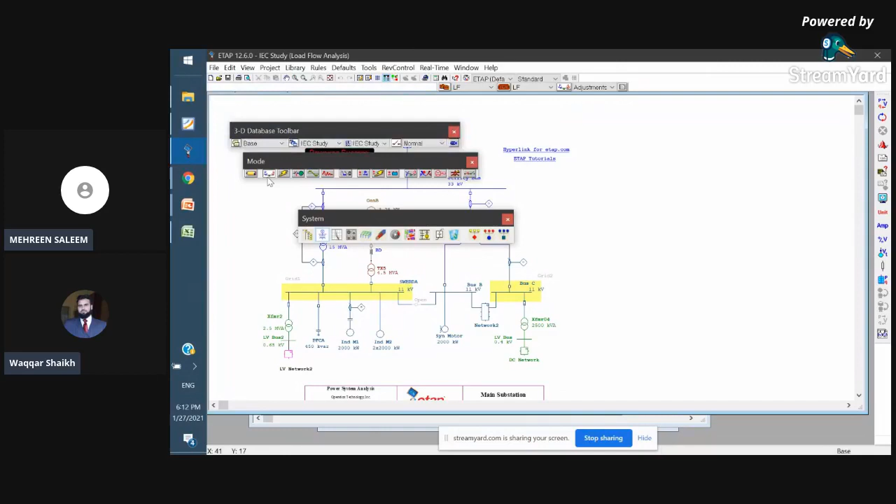You can see here, there is one toolbar here. There is another toolbar here, and another toolbar hidden here. It's taking some time to load. Anyway, sometimes it also loads the library of the software.

Meanwhile, we'll go into the main presentation so that I can outline the topics we are going to learn. First, we will see the overall interface and the various toolbars in ETAP, and then we will talk about 3 important toolbars. Still it's taking time.

Okay, no problem. Now you can see in this PDF, this is the PDF which shows you the overall interface. Here we have different toolbars, and all these toolbars are for some purpose. I think I have to disconnect it and run it again.

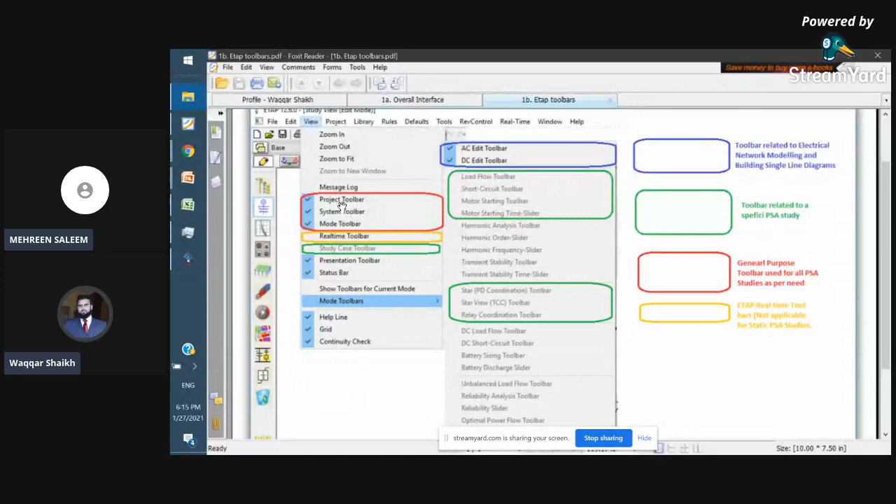So let us talk about the general purpose toolbars, where we have 3 types: project, system, and mode toolbar. The project toolbar is the first one you can see right over here at the top. Most of the buttons you are already aware of; they are more or less similar to the buttons available in Microsoft Office or Word.

But some of the important buttons here are the continuity check, this button here, and the grid, which helps us model the network with proper indentation and check whether the bus is energized through a swing bus. I will explain more about continuity check later. So this is the project toolbar. It allows you to open and create new projects.

The second toolbar among the general purpose toolbars is the mode toolbar. This mode toolbar is the backbone toolbar, and all the functioning of the software can be controlled through it. It has many modes. The first is edit mode, and the remaining modes are load flow, short circuits, motor starting, harmonics, transient stability. All types of power system studies are covered in these modes, where you can switch between the edit mode and the system study modes.

I apologize, I think the software is again struggling. Okay, now it's working, alhamdulillah. Now in the edit mode, we can do the network modeling. As you can see, there is an existing ETAP model here.

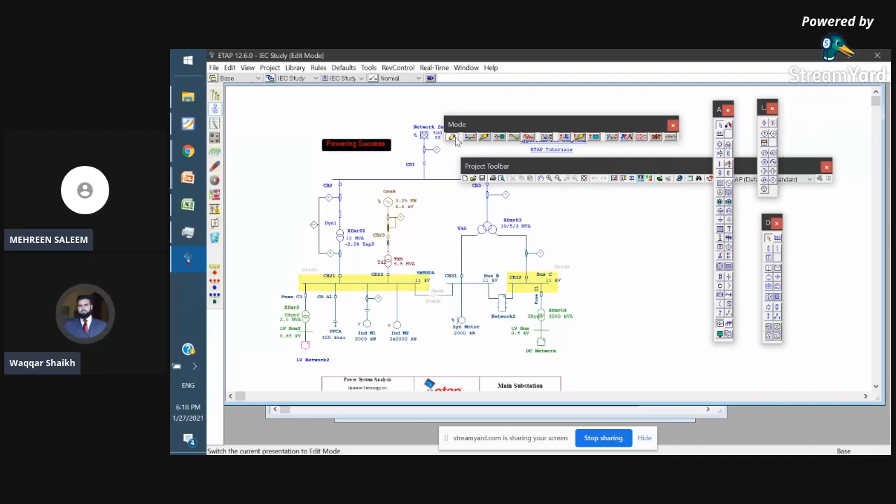Okay, so these three toolbars are basically for the modeling purpose. You can create the network modeling from these three toolbars, and these three toolbars will be only available when you are in the edit mode. If you go into any other mode, these three toolbars will be hidden and it is interlocked with edit mode. For example, if I go into the load flow mode, you will see that the toolbars have gone. So it will be only available in the edit mode.

Okay, so I hope you understand the mode toolbar, the project toolbar, and the AC, DC, and instruments toolbar, which are available in the edit mode. In order to send them back, you can click on the blank area. Okay, then you can see there is another toolbar which is called system toolbar. In this system toolbar, some of the buttons are very important, but most of the buttons are not used for distribution network studies.

I can give an example, like we are mostly using the one-line diagram view so that our workstation is available to us where we can do the simulations and make the models, right? Also, there are some buttons which are related to the protection coordination study, which mainly relates to the coordination of protection devices like protection relays, circuit breakers, or fuses. So in order to see their behavior and coordination between each other, we can use this feature, which is Star view. It enables us to see the time current characteristic curves.

There are some other buttons like underground raceway systems, grounding mesh analysis, and cable pulling systems. But most of the time for distribution networks, we are more or less concerned with Star systems and one-line view. And then we sometimes also need to go into the dumpster. It is just like the recycle bin. It's a very interesting feature in ETAP. People consider it similar to the recycle bin, but it does not work like that. I will try to explain some part of the dumpster in this discussion.

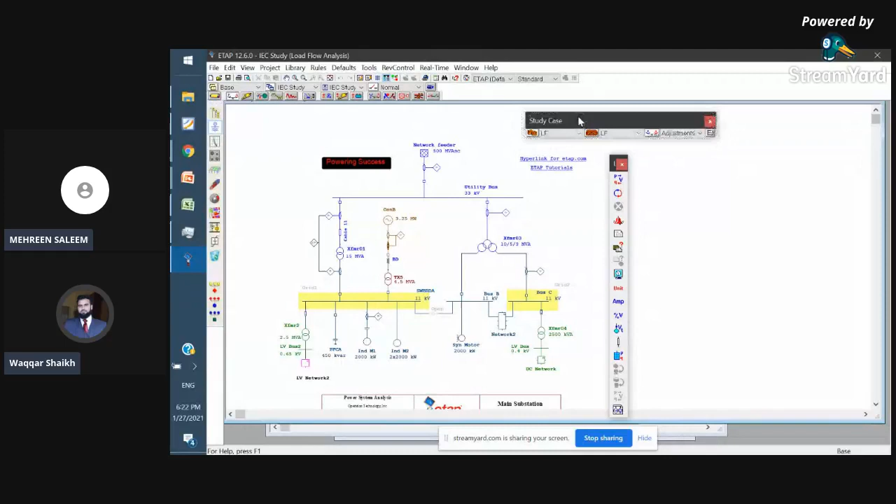This is one of the most technical toolbars in ETAP software, and one who has properly learned this toolbar and its features is more or less 80% knowing about that particular study. So I don't know when the students are learning by themselves whether they pay attention to this toolbar or not, but my focus will be to give you more detail about this toolbar in our coming discussion. So the study case toolbar is one of the system study toolbars, which in this case, as we are in the load flow mode, you can see here, is a load flow study case toolbar, right?

And then the other important toolbar within the system study mode is the analysis toolbar. This toolbar contains some buttons which enable us to run the simulations, and some of the buttons which will be frequently repeating, like this bell button, alert view, or the report manager, or the display options. These options will be repeatedly coming in all the analysis toolbars in the rest of the study modes. So you understand that these two toolbars are typical toolbars for all different types of study modes.

If I go into the short circuit study mode, you will find the same two toolbars now becoming the study case toolbar for short circuit analysis and the analysis toolbar for short circuit analysis. And the buttons would have changed, the features and the inside functionality would have been changed. Okay, but the concept will remain the same, like the functioning of the software will remain the same, study case and the analysis toolbar. And these two types of toolbars are specific to system studies.

Again, if we go into the motor starting mode, you will also find these two toolbars here. So it's important that you learn some of the common features of these two toolbars, that I will try to explain. But the specific features of these two toolbars will be more related to the system study knowledge. Okay, so I hope you have understood the way these two toolbars are presented, study case and the analysis toolbars, which I'm calling system study specific toolbars.

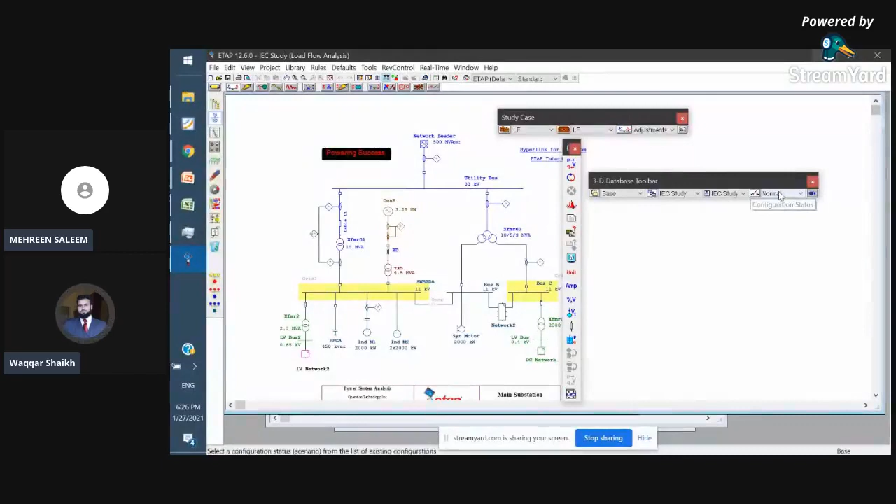Okay, it means you can have 3 or 4 configurations, and similarly you can have 3 or 4 simulations based on different configurations. Okay, so the 3D database toolbar configuration feature will enable you to create different types of configurations in your network model. Okay, and the revision database toolbar is more about the equipment properties. Let me give you an example.

For example, a factory is newly constructed, and new transformers and new electrical equipment have been erected there. Okay, and after some time, one of the electrical transformers there is going to be upgraded to a higher size rating. Okay, and in order to maintain a revision history, so that any next user who is going to work on ETAP software will have the previous history knowledge or the understanding of the past network, he can check it from the revision database toolbar.

This option is also sometimes useful when we are doing arc flash analysis, where we want to see the behavior of the protection settings. By changing the protection settings on the arc flash levels, we put one type of protection settings under one revision database, and another type of protection settings under the other revision database. By switching these different revision databases, we can check the behavior of the network arc flash levels for different types of relay settings. So this can be used based on the engineering requirements.

So this 3D database toolbar is one of the important toolbars required for any type of system study. You cannot proceed with simulations unless you have created some configurations in your project. If it is a simple radial network, you would not be required to create configurations, because a radial network means there is only one source of power. But for a double-ended radial network, you will be required to make some configurations here. I will tell you in my rule of 9 where this toolbar will be used. Okay, 3D database toolbar.

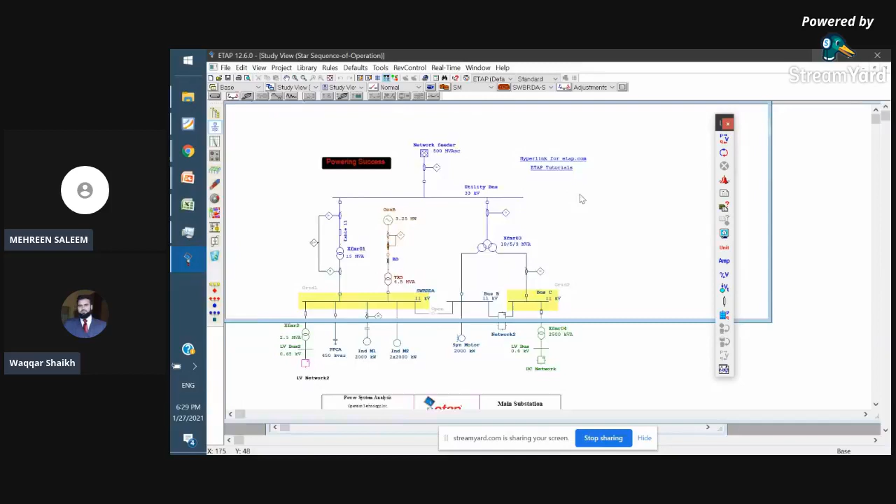Now you can see here, in the load flow mode, I have this option available, and display options will enable me to see all these options. This display option allows me to see the results of the simulations under different units and different parameters. Whenever we run a simulation, the results appear in red color, and then the results tab of the display option is applicable. If you want to choose what information the screen displays for network elements like a generator or power grid, you have to go into the AC tab.

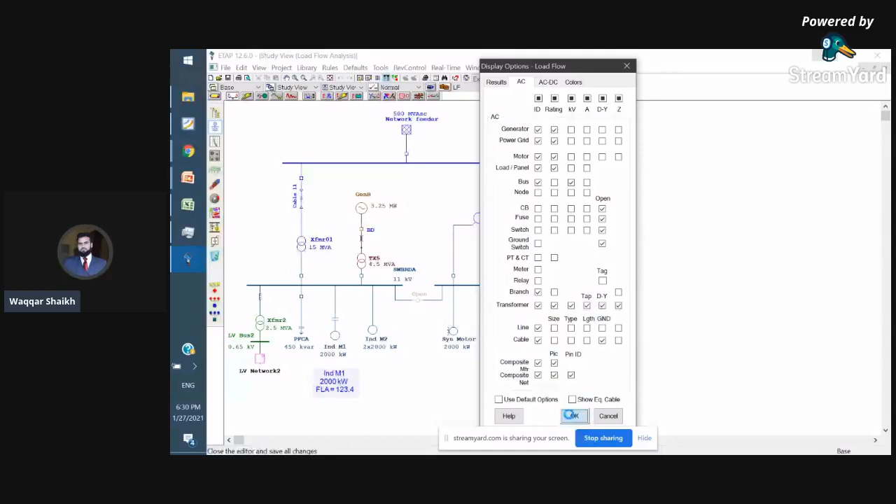For example, if I have a transformer modeled in the network and I want additional information shown on the display in load flow mode, I can enable features here like kV, tap, the grounding configuration, and the impedance. If I click OK, this information appears just beneath the transformer, as you can see. So the display option enables me to show more information on the screen depending upon my requirements.

Normally in system study modes like load flow, we do not need to show so much information about the equipment; we are more interested in the results, so we do not show much information. But in the edit mode, somebody may ask how to control the displayed information, because there is no button that looks like a television screen. If you look carefully, you will find the display options here. This is where you control the amount of information shown on your network model.

You can see here, I can change how much information I want to show on this display. This feature is very useful. Sometimes we are not required to show so much information about the equipment, so we can control the amount of information shown in the workstation.

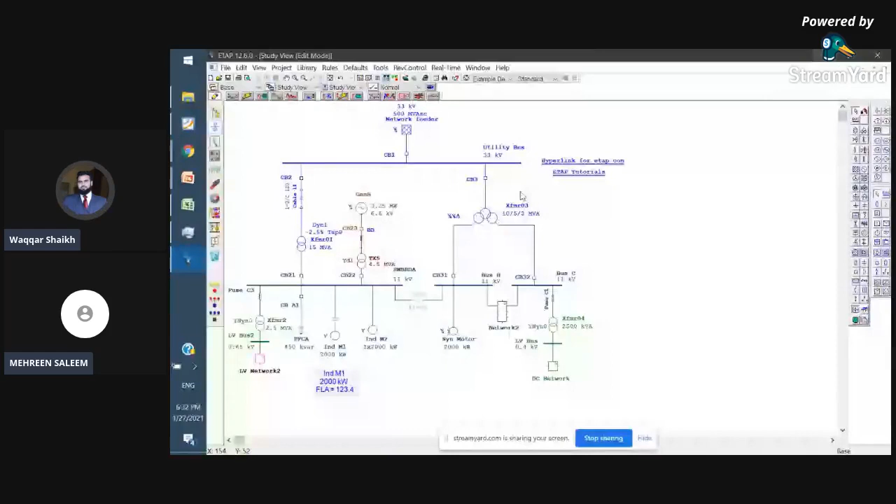If I go to the next feature for this analysis toolbar, report manager. This is also a repeatedly occurring option in the analysis toolbar, and you will find this option available in all of the system study modes. This is the report manager here. And if you go into the short circuit study mode, again, you will find a report manager here, similar like the other options. So whenever you are running a simulation and you want to make the reports from ETAP software, the report manager will help you.

Okay. So if I go into this report manager and if I have run a load flow simulation, I want a complete report of the study, I can use this complete feature. Or I want some specific results, I can use these features. I want some summary information, I can use this feature. And I can have different options, like I can print it in PDF or MS Word, whatever is my requirement. So this is also one of the repeatedly found buttons in the analysis toolbar.

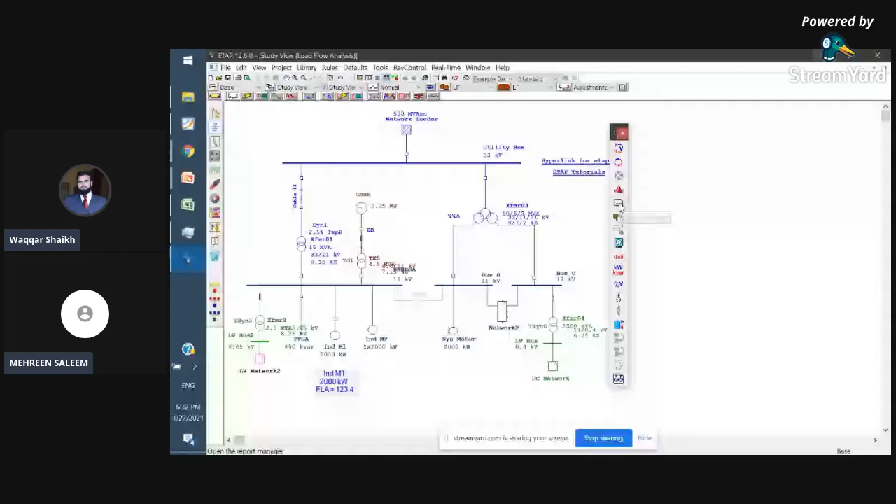If I go to the third option, alert view, this is a very interesting feature. In fact, this is a very useful feature for those who are doing ETAP studies. For example, if I go into the load flow mode and run a simulation, it will give me the results. And in these results, I will find that some of the equipments remain in their original color, some have turned into purple or magenta color, and some have turned into red color. So basically, this bell option or alert view will enable us to see where we have problems in our simulation. The problems which are the most critical, we would definitely need to solve.

For example, if I run this simulation and I find that the generator has turned into red color, it means this generator is overloaded, or it is suffering from excess reactive power provision to the network or excess reactive power absorption from the network. So at that time, we have to investigate the problem and find the solution. So the alert view option will enable you to see the different possible hazards or critical alerts in the network after the simulations are run. If I click this option, it will also show me where those problems are occurring, what are the reasons, what are the set points and what shall be the standard values.

Okay, so you can see here, if I have run this simulation, it is showing me that at bus location A, we have an under voltage of 94.9. The bus was originally 650 volts, but it is operating at 617 volts. So as per IEEE standard 399, we should not have lower than 95% voltage in the network after a successful load flow simulation. So lower than 95% means this is a critical alert for us, and we have to find some ways to improve this voltage to a higher value.

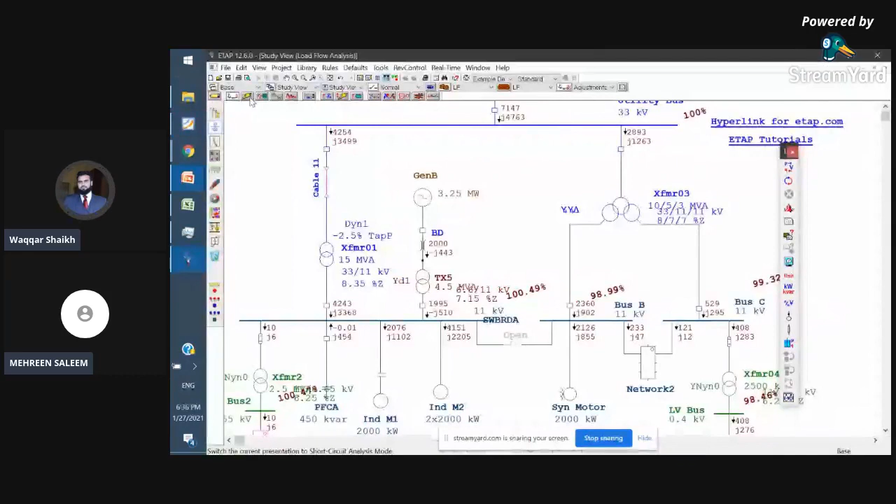So if you see in short circuit mode, you will not find the plots option here. But if you jump into the motor starting mode, you will find the plots option here, and it will allow you to see the different plots: motor starting current plot, or the motor's terminal voltage plot with respect to the time after the moment the motor has started and it has reached its steady state operating condition. What are the changes in its voltage level? So from this plots feature, we can investigate the performance of the motor during a starting condition.

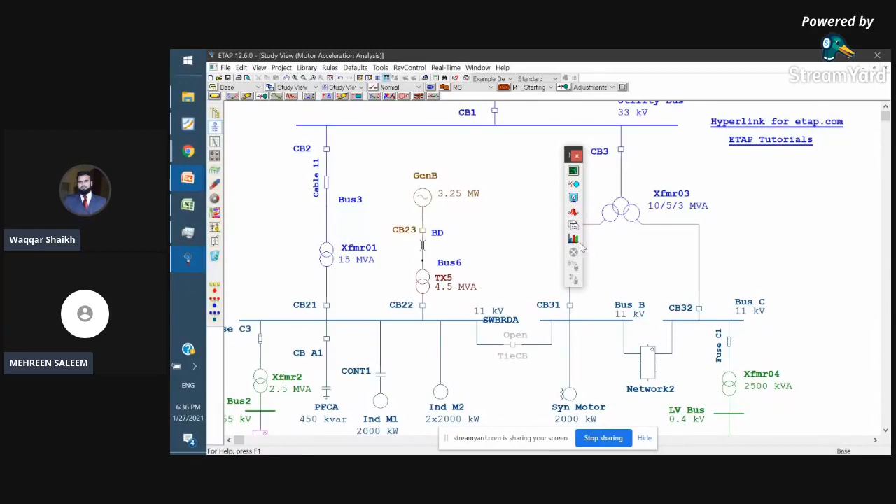So this is also one of the repeatedly found options depending from study to study. If you see this PDF, when you will be given the contents, you can find all the details of these 4 buttons in the next pages. Now we will see the overall interface of the ETAP software. I hope you have gone through the overall interface of the software, and these 30 minutes of discussion would have given you a basic idea what are the different toolbars in the software, and what its interface looks like.

I would repeat, some of the toolbars are general purpose toolbars like the project toolbar or the mode toolbar or the system study toolbar. Some of the toolbars are related to the network modeling, AC/DC element tools, or the instruments. And these 3 toolbars are interlocked to the edit mode. If you switch the edit mode, these 3 toolbars will disappear. So these toolbars can only be used as long as you are building an electrical network.

And the 2 toolbars which are specific to the system studies, as you can see here, are the study case toolbar and the analysis toolbar. These are the 2 toolbars which are specific to a system study, and you will find these toolbars repeatedly in all the modes. The looks will remain the same, but the features inside these toolbars will be changing from one study type to another. So with this, I end the first topic of our discussion. I hope this little introduction about the ETAP interface will be useful to you.

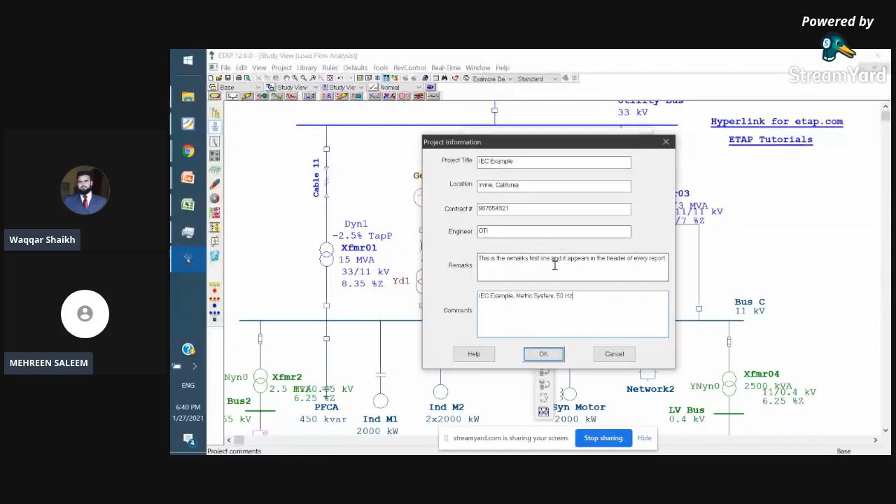What will be the benefit if we give all the details here? The benefit will be, when you run the simulations and have the study reports printed, all this information will be found on the reports created by the software. Normally the students who are in the early stage do not look into this feature and they print the reports without the information, especially those industrial professionals who are using the software as a casual user. They do not take care of this step, but it's an important step to give a professional look to your report in the end. So this is not a technical step, but it would give a good impression of your study to the next person. So the first step is to give the project information.

The second step is enter the project applicable standards. This is a very, very important step. And many ETAP users who have not worked properly or who have not gained experience in this field sometimes miss this step, and they do not know the importance of this step.

If you see here, ETAP is giving you the options to consider one out of the two standards, IEC or ANSI, and the different frequency levels and the systems of unit. Okay, and date format. Date format is not important, but the first three options are very important. How? I will explain to you.

There are two standards which are globally used by engineering companies for conducting power system studies. If I'm doing a fault analysis, it can be done as per IEC standard or it can be done as per ANSI standard. So if we keep our option as IEC, we will only see in the software interface the relevant terms as per IEC standard. And the same standard will be applicable for all the simulations, and the methodology and all the equations will be applicable from that standard, IEC standard.

Let's take an example of a short circuit study. Short circuit study is done as per IEC 60909. So if we are keeping the standard IEC, by default ETAP will take this option in the software as IEC standard. All the simulations will be considered by default IEC. You can switch this information within the software interface at different places.

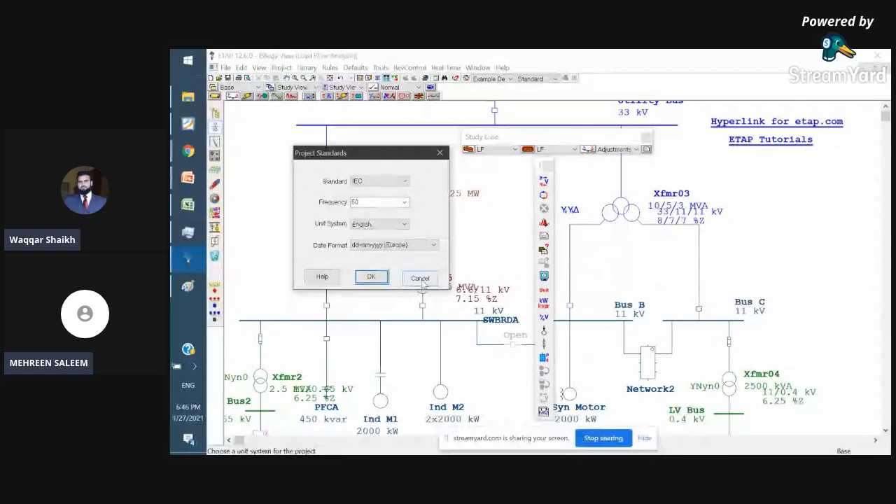So there are two types of cable sizes based on the English system or the metric system. So it's important that you select the right option here, so it will not create any discrepancy when you select the cables in the ETAP software. So this is the second step, which is important for you to fine tune in the ETAP software when you are creating a new project.

The third step is to build up your model. This is called network modeling. Most users who start working on the ETAP software start directly on step number 3. They forget to implement what has to be done in steps 1 and 2, and it creates many discrepancies at simulation time, and it also gives a bad impression to the one who will review your work. So always follow step 1 and step 2.

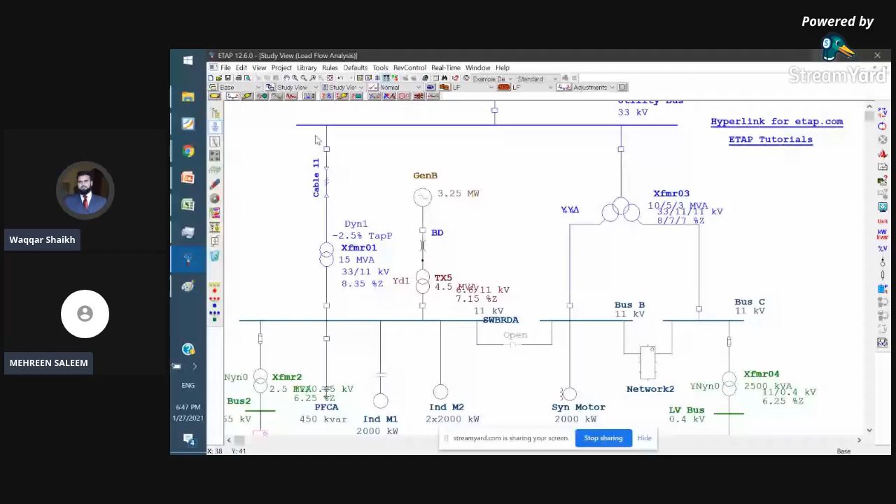Step 3, I'm splitting into three steps. The first one is to enable the grid option, the second is to enable the continuity check, and the third is to start building the electrical network. So if you are doing step number 3, there is a feature in the project toolbar. You can see here this feature, show grid lines.

So you can see these are the grid lines in the ETAP software, and these grid lines can be made brighter by changing the options from here. There are options available inside this button where you can make them brighter or lighter. Yeah, from here you can change its color. You can see I'm making it navy blue. It has changed, but do not make it so dark that it confuses your network. I'm just giving you an example that we can also manipulate the sharpness of these grids.

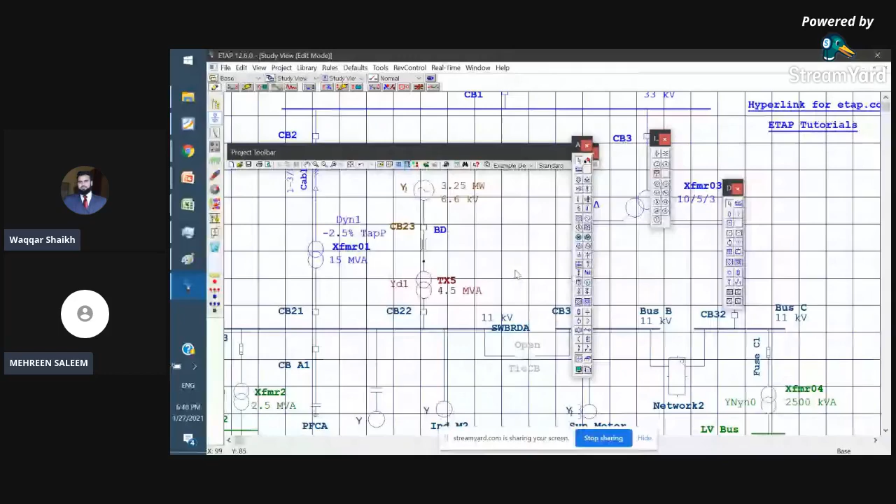So let me bring it back to the normal color, which is easily identifiable. Let's make it gray. So now it's again turned into a slightly dull color. So first thing is you have to enable the grid option. The second option is continuity check. This continuity check is important, especially when you are working on network modeling and you want to make sure that your connections are properly done.

If you are not enabling the continuity check, it will not give you a sense of energization of the equipment. For example, I have this breaker. I'm opening this breaker. You can see at this time the continuity check is enabled. If I disable this check, it will turn this de-energized feeder into the same color as the rest of the network. So it will not tell you whether this is energized or not. So it's always advisable to keep the continuity check on during network modeling, so that you are comfortable with the energization of the equipment in your network model.

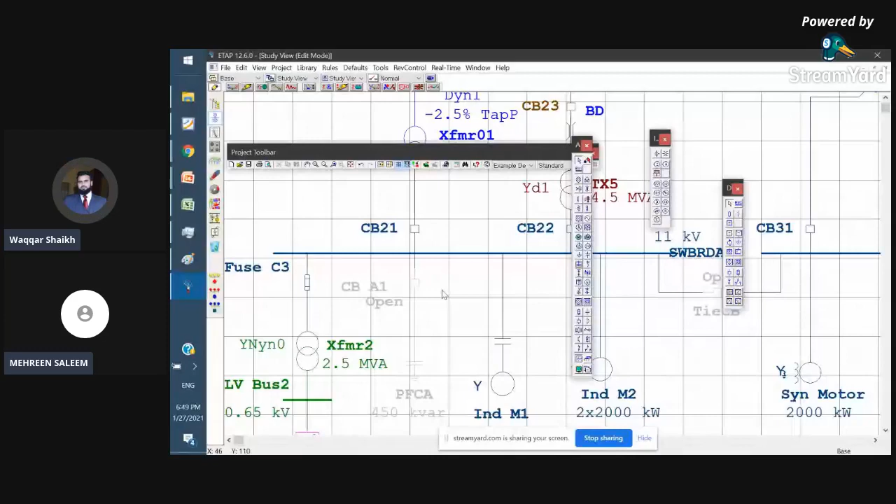If I go into the technical depth of this continuity check, even in the help of the ETAP software, you will find that continuity check doesn't mean connection correctness. Continuity check means the given component, bus, or electrical equipment is connected to a swing source directly or indirectly. A swing source is mandatory for running any type of study. If you do not have any swing source or swing bus in the network, your network cannot be energized.

Let me give you an example. In this case, the swing source is this utility. If I disable this feature and make it a voltage control source, the whole network will be de-energized. Power system analysis students would have studied in their course that the swing bus is like a reference bus, slack bus, or infinite bus that enables us to run the simulations and the load flow solutions.

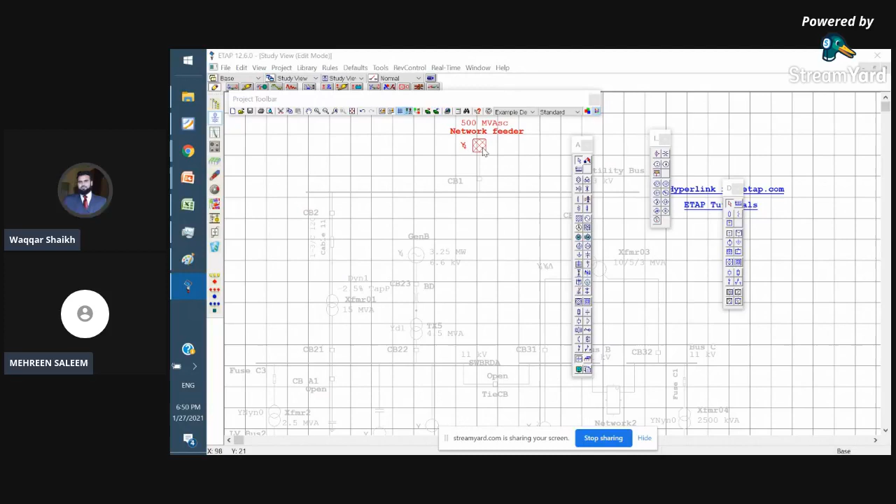So if we enable this continuity check and a component turns into a bright color, it means that component is directly or indirectly energized through the swing bus. Without the swing bus, your network cannot be energized, and you shall have at least one swing bus in the network for conducting any type of simulation in the ETAP software.

Okay. So now after you have enabled the grid, you have enabled the continuity check. Then the third thing is network modeling. You have the AC/DC element toolbars, which will enable you to do the network modeling. You can bring the grid, you can bring the transformers, motors, cables, generators, VFDs, breakers, fuses, contactors, whatever, all the electrical installation components you can find from these toolbars, and you can use them in network modeling.

ETAP tutorials and the YouTube videos can help you to understand how to model these equipments. But the most important thing is you shall be physically aware about how this equipment works. Okay. So for example, if you are modeling a transformer, you shall be physically familiar with the nameplate data of the transformer. Only then you will be able to understand how you are going to model the transformer. In this discussion, I am not going into the modeling details.

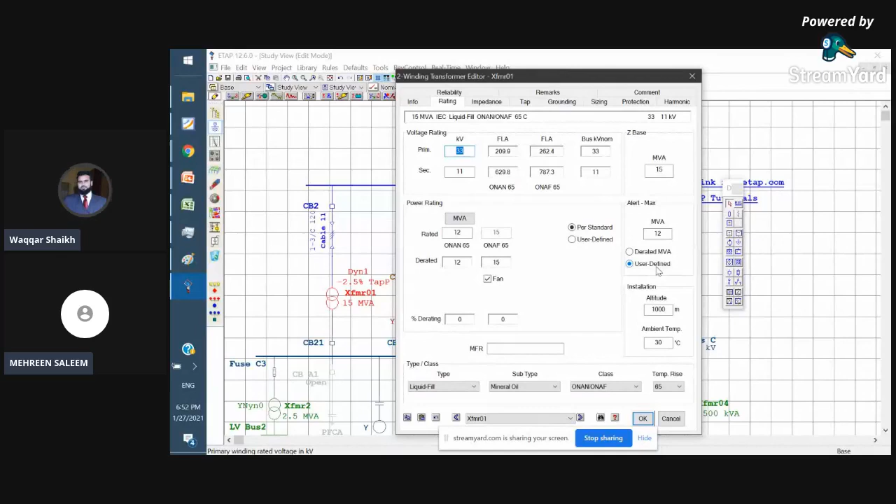But the thing is, whenever you pick and drop any component, you have to go into the component and give the software all this information. Some of the tabs are not relevant to the study. Some of the tabs are relevant to your particular study. So you shall have understanding of the equipment data so that you can input that information into the given equipment during the modeling of the network. Okay. Now you can see here as the third step, 3C, you are building the electrical network, AC/DC elements. Okay. Now let us see step number 4, creating various network operating configurations.

Okay. So as I told you, after you are done with the network modeling using the edit mode, you should not jump directly into any of the study modes, because there is one very important step which is called defining the configurations. Okay. So using this feature, we can define different configurations of the network: normal operating configuration, abnormal operating configuration, like single-ended operation of a dual-ended switchgear. Okay. So by using this feature of the 3D database toolbar configurations, you can create different configurations. And one of these configurations will be considered at the time of simulation. When you change the configuration, your simulation results will also vary.

Okay. So now in step number 4, we are creating a few configurations in the ETAP software depending upon our study requirements. In step number 5, now it is the time to go into the required study mode. So from the edit mode, we are jumping into one of the study modes. As per IEEE 399, whenever we have a network, we are always required to conduct a load flow simulation to see the base conditions in the network, if the network will be successfully running under normal operations. Okay, then we can jump into the other types of studies like short circuit or arc flash, but the first base level study is always a load flow study.

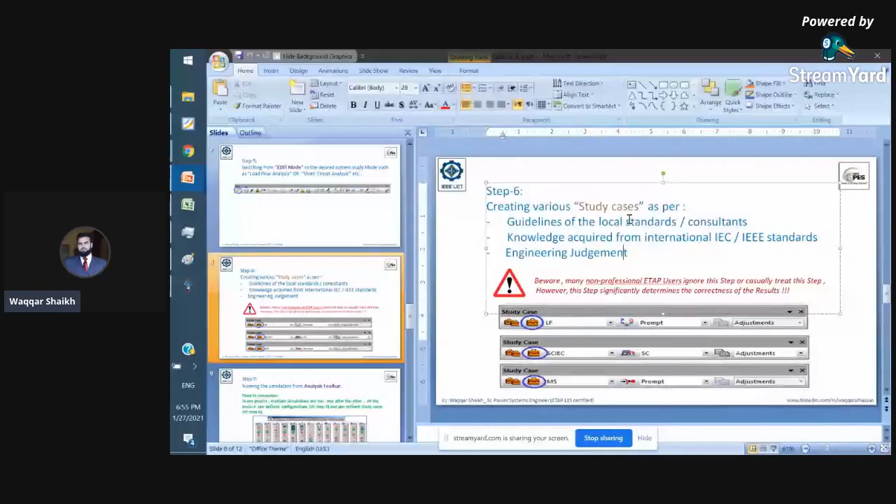Some of the options also require you to have some engineering judgment, like the fundamentals of electrical power systems engineering acquired from international standards and your own engineering knowledge. So based on these three set points, these three criteria, you are going to fine tune the study cases. Let us see how it works.

For example, I'm in the load flow mode. I shall not run the simulation directly from the analysis mode. If you are taking any ETAP training and the ETAP trainer is just asking you to make the network and run the simulation, there is 100% chance that he is not the right trainer for you, because he has missed a very important part in all this simulation, which is related to the study case editor.

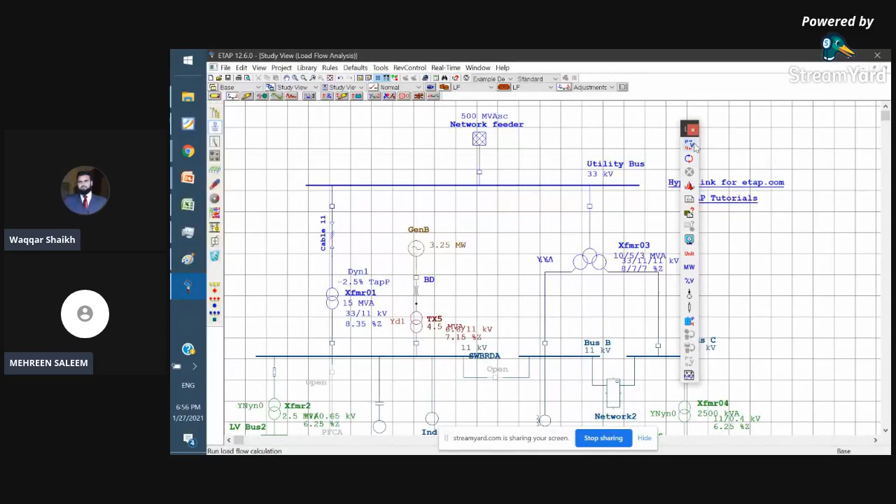So always give more and more detailed time to this type of toolbar, which will enable you to give the set points for a given system study. Let us try to see how it works. In case of load flow study, you will find there is an option edit study case. By default, you will have only one study case created here, but you can create multiple study case scenarios.

So if I go into this option, you will find we have 4 tabs here: info, loading, adjustment, alert. Emergency is not relevant for most of the offline studies. It's related to the online studies. So I do not encourage you to go into this tab, those who are doing the studies in the offices before the actual installations. So info, loading, adjustment, and alert tab, these are the 4 different tabs that you must be familiar with. You must be familiar which options you have to select here.

If we are not selecting the right option, or we are not giving the right set points for the study, most likely your study will end up with a wrong set of results. So those who are pursuing any trainings, they must ask the trainers or the mentors, please tell us what each and every option is and how they work. Without understanding these options, you cannot be confident in use of your software. And how can you fine tune these options properly?

Only after you have the knowledge of the international standards, the local guidelines or the specifications, and you have some engineering judgment. As I told you, sometimes the local specifications require you to run the simulations considering the Newton-Raphson method. So you have to select the Newton-Raphson method. In my experience, I found that this is one of the most accurate methods. Although we can change the methods depending upon the different type of distribution networks or transmission line networks, as a typical option, I consider the Newton-Raphson method.

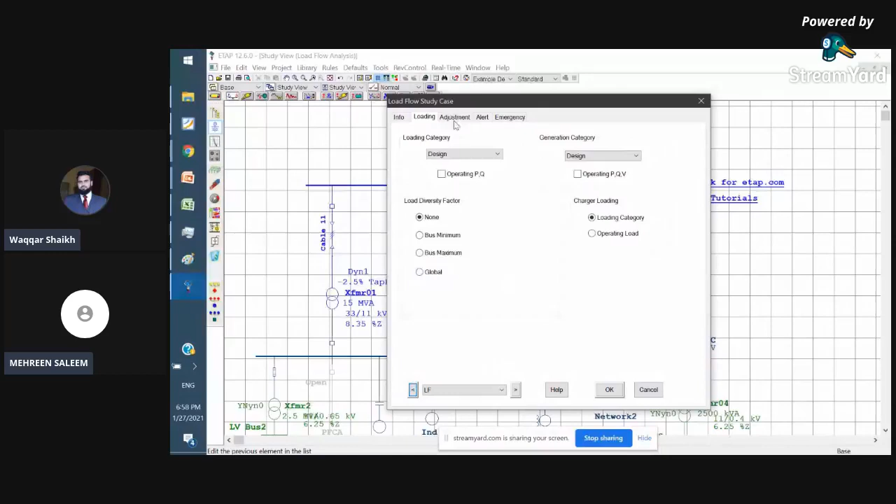In the load flow study case toolbar, there are some options like adjustments. You should be familiar with all these options if you are saying that you know how to run a simulation, or you are doing a correct simulation.

And alerts is one of the most important tabs in any study case toolbar, where you give your set points. So if your bus is a 100 amps bus, and after running a simulation your bus is passing 105 amps, the bus will appear in red color, because you are giving a critical alert up to 100% loading. And if that bus is loaded up to 96 amps, it will give you a marginal alert, magenta color, because you are between 95 to 100% of the loading.

And if that bus is working fine, healthy, then it will have no alert view, or there is no indication on the software. So basically you are giving the set points for your alerts related to critical alerts and marginal alerts. Okay, so if somebody has changed these alert options here, then he will not be able to see where the problem is in the network.

So you must consider this important toolbar, load flow or the study case toolbar. You must fine tune all the options. You must ask the trainers what these options are, how to consider these options, what are the bases for selecting the options. Okay, let me give you another example.

In case of short circuit analysis, you can see here, in the past, ETAP was used in short circuit mode for short circuit as well as arc flash, but in the newer versions, arc flash has been separated. So now you can see here, there is one study case created for IEC 60909 type of study. This short circuit simulation is based on IEC 60909. If I go into this, you will find that another set of selections comes.

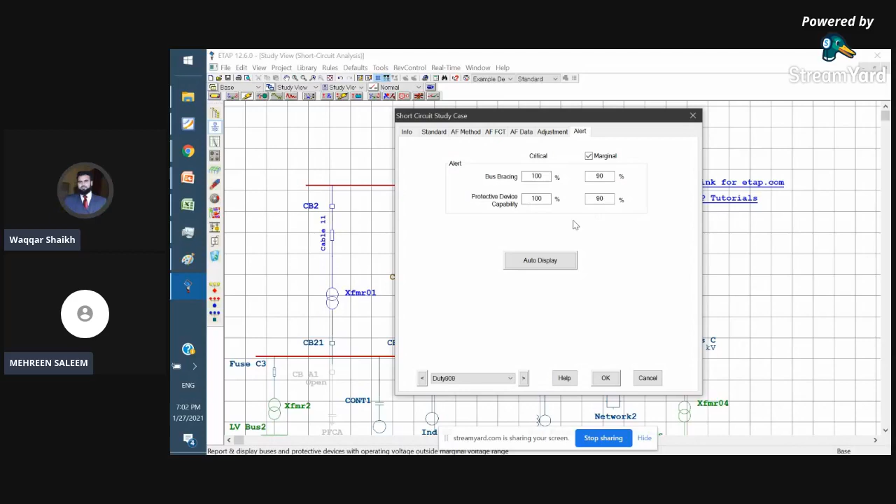So I hope you understand why these options are important, because these are the set points or the prerequisites before running the simulations. And these options can be fine tuned after you have the knowledge of that particular system study. I clearly explained in my last session that if you want to learn the depth of the studies and understand the concepts, you should also refer to IEEE 399, the Brown Book. It contains chapters like load flow, short circuits, protection coordination, motor starting.

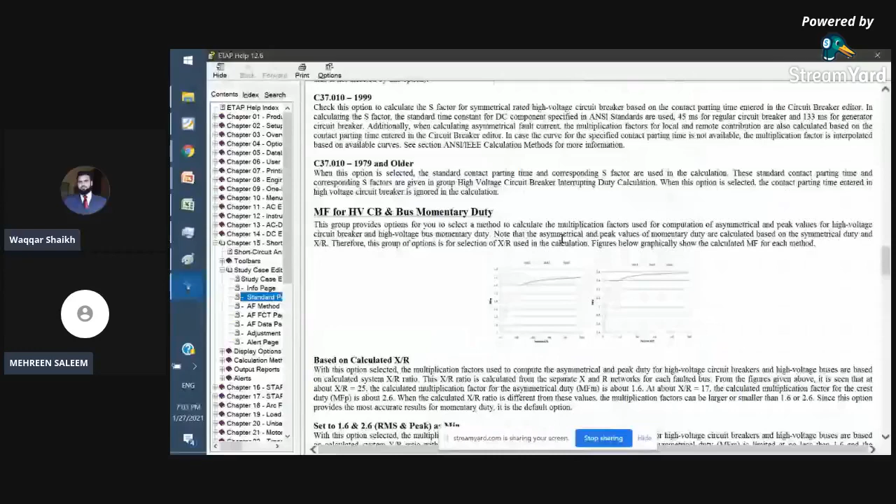Learning from there, when you come into this window or this section of the ETAP software, you will be very comfortable with the options given here. Without building the fundamentals from the international standards, you will get confused. And even if you go into the help file, it will not tell you everything directly. Some things will be explained and some things will take you back into the standards. For example, there is one feature of short circuit studies if we are conducting it as per IEC standards. Okay.

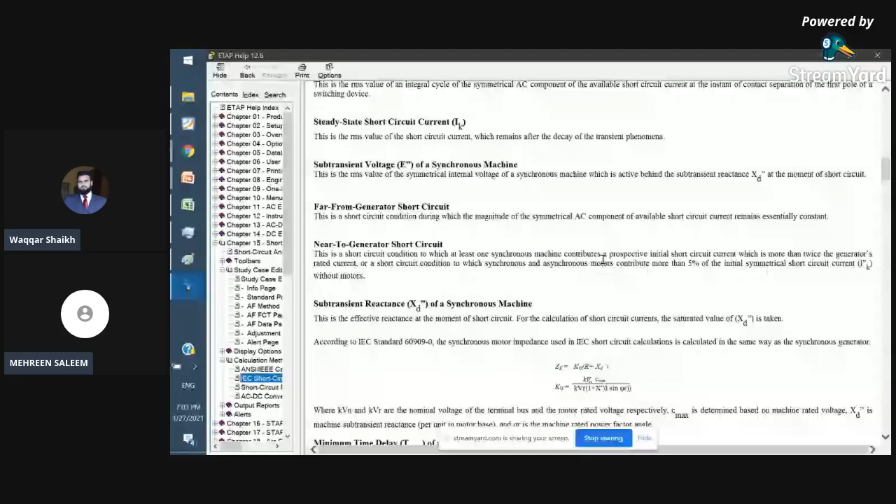Yeah, for example, this X by R for peak kiloamperes, method A, B, and C. If you go there, it will explain that method A is applicable for radial networks and method C is useful for mesh networks, but it will not explain what mesh networks are. So in order to understand what mesh networks are, you have to jump into the IEC standard applicable for this study, IEC 60909. In that standard, chapter number 4, you will find the explanation of the mesh network, how mesh networks are made and what the important concepts of a mesh network are.

And if you are not selecting the options properly here, it would result in different values of the peak currents, and these peak currents are used for the bus bar electrodynamic withstands. So using the right method will enable you to see the right short circuit levels, and those short circuit levels will enable you to select the right bus with the right withstand capability.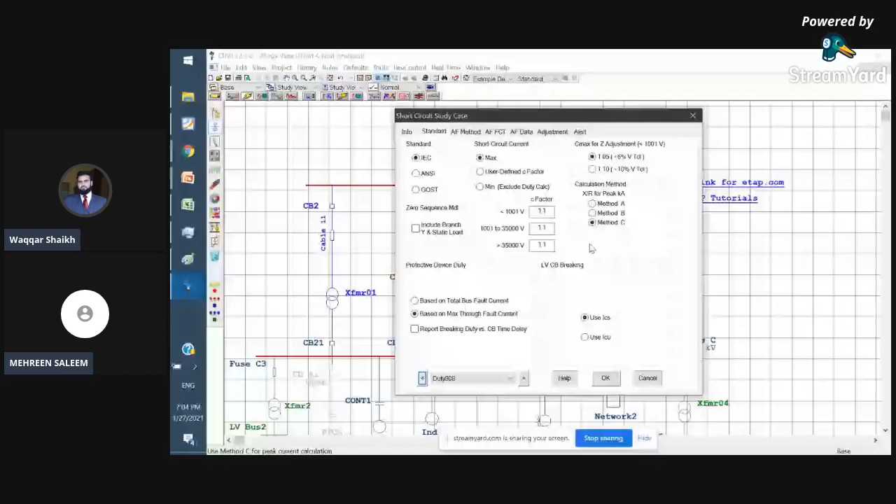So I mean to say that here you have all the options which are related to the IEC standard. And if you have the standard knowledge, you know how to apply the standard properly, then you can fine-tune these options. So you must ask your trainer or coach, whoever you are going to learn from, or if you are struggling by yourself, then go into the right standards and search yourself what these options are and how they work. So without selecting the right options in each of these two toolbars, you will not be able to ensure correct results in the end.

So I'm saying here: beware. Many non-professional ETAP users ignore this step or treat this step casually. However, this step significantly determines the correctness of the results. So never miss this step in your simulations. And to properly fine-tune these options, you should have fulfilled these 3 criteria as an ETAP user.

Step number 7 is now jumping into the analysis toolbar. If you see here, this is the analysis toolbar. So after you have given the configurations, after you have given the set points in the study case toolbar, now you have two functions. One is the configurations function, which is selected from here, normal configuration or abnormal configuration. Different configurations can be created. The PDF that I have shared contains all the information on how to create the configurations.

Selecting one of the configurations, selecting one of the study cases from here, then you will run the simulation. Your simulation will only give you the same results if you are selecting the same configuration and study case. By changing the configuration, you will have a different set of results. So after fine-tuning the right configuration, after defining the right study case, you can run the simulation and you will be able to see the network results.

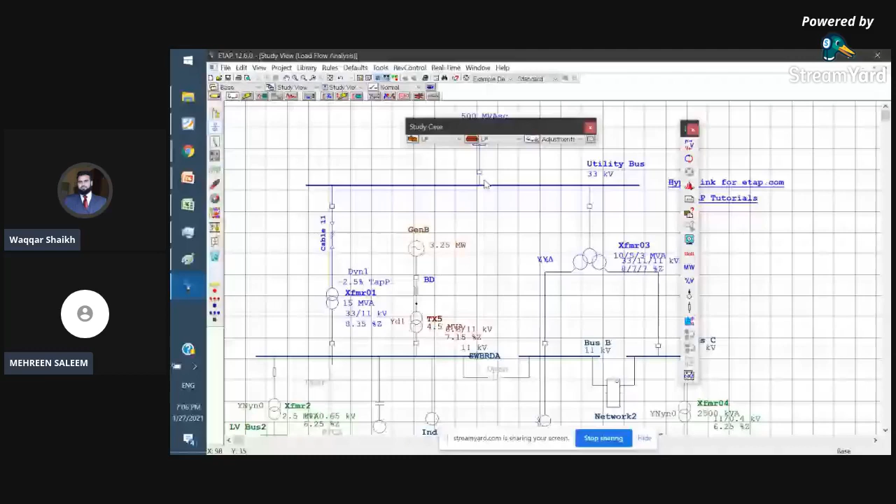And in a load flow study, we are normally interested in finding the bus voltages, line currents, and active and reactive power flows. We're interested to see the cable voltage drops. We check whether the equipment ratings are as per the required load flow results or not. Sometimes some transformers can be found overloaded. Sometimes some cable can be found overloaded. So we can fine-tune those components, or we can rearrange the load configurations to bring the results within the acceptable limit. So in step number 7, we are running the simulations from the analysis toolbar.

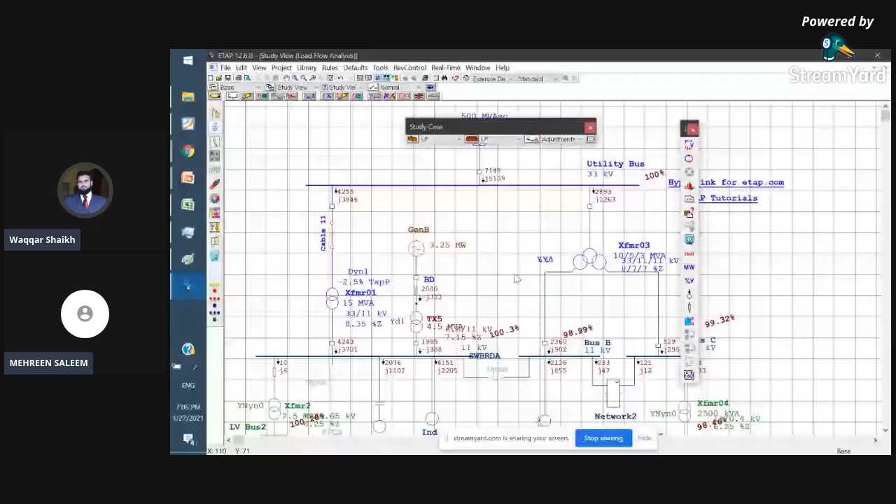Point to remember, there can be multiple simulations. When you are pressing the simulation button on the analysis toolbar, it's not that you are running only one simulation. There will be multiple simulations, one after the other, on the basis of predefined configurations, like a normal load flow scenario, minimum system load flow scenario, or maximum system load flow configuration, like step number 4 which we discussed. And there can be multiple predefined study cases.

So by using one type of study case and one type of configuration, you can run one type of simulation, and that simulation will be one set of simulation results. Then you can go into another set of simulations based on another type of configuration and other study cases. So step number 7 is running the simulations by considering multiple simulation scenarios, and we are assessing the network performance based on different simulations, different configurations and different study cases.

Step number 8 is when you run the simulations, you will have the results on your ETAP window, and these results are to be interpreted. Like when you run a simulation, for example, I am running a simulation. Let me make it dull because the black color is appearing.

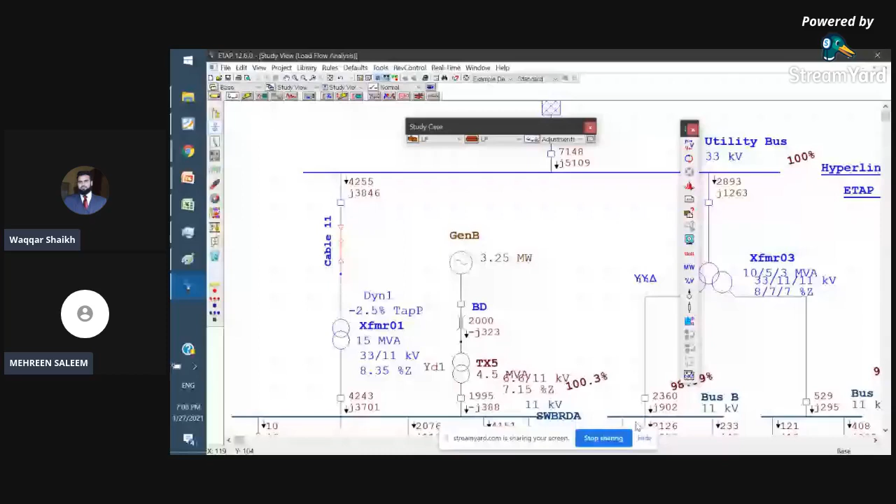Okay, so now you can see here, when I run the simulation, I found that cable 11's color has been changed. Okay, if I go into the alert view, it will indicate the problem. For example, cable 11 has an overload problem. You can see here this cable has an overload problem because the cable is rated for 97 amps and it is operating at 103 amps.

Okay, so what has to be done? Either we have to increase the cable size, or we have to reduce the load to let this alert disappear. Okay, so let me try to correct this problem. So what I will do, I will go into the cable editor. Instead of going during the load flow mode, you can go back into the edit mode. From there you can go into the cable, and you can increase the size, because increasing the size will increase the cable ampacity. So it will be able to carry more current.

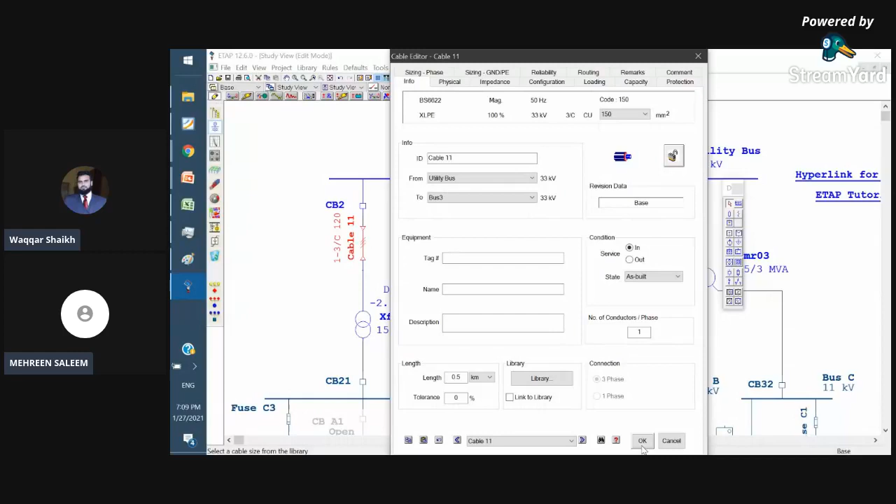Okay, so if I click OK now, and now if I go into the load flow mode and I run the simulation, now you can see there is no change of the color. You will not find cable 11 as an overloaded cable, because now the cable is operating within its rated conditions. So it means whenever you run the simulations, you will be getting results, and these results are to be analyzed and interpreted by the power systems engineer.

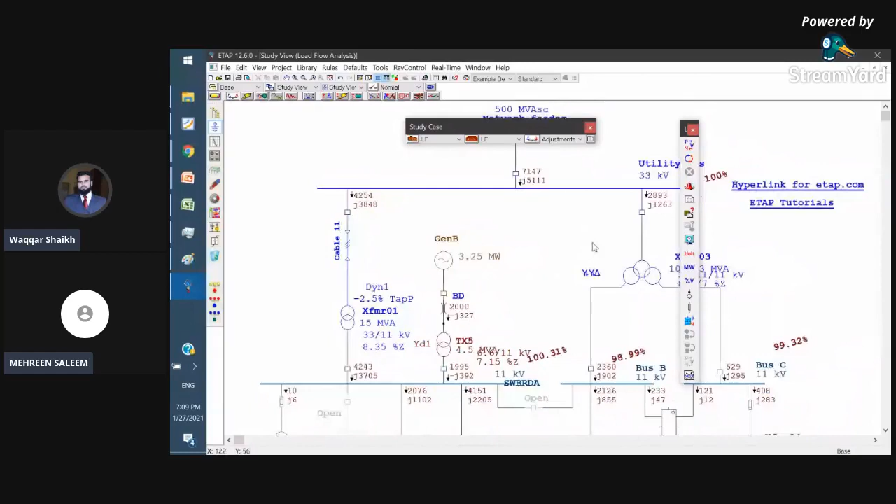One of the important study reviews will be, you will see all the equipment like transformers, cables, breakers, and the buses. Are they properly sized? None of them are going into critical alert or marginal alert. Okay, there is one deficiency in ETAP software, I would say, that it does not give you the indication of oversizing. Like if this transformer is 100% loaded or more than 95% loaded, it will give you a critical or marginal alert. But if this transformer is double size, like the load flow gives you 100 kVA and the transformer is 500 kVA, it will not give you any indication.

So here comes the engineering judgment that you should not select the transformer much more than your requirements. So normally there are some factors, growth factor, and there are some calculations, demand calculations, which enable you to size the transformers properly. Accordingly, you have to consider the transformer kVA rating. ETAP will not indicate the oversizing of equipment. It will only indicate the undersizing of your equipment.

Okay. So now you can see here in step number 8, we are running the simulations. We will be shown critical alerts based on our alert settings inside the study case toolbar. There are alert settings as I have shown you, 95%, 100%. And then by analyzing those results, we can go back into the edit mode and do some fine tuning, change some network configuration, and then come back into step number 8 and run the simulations until we are getting green results. It means we are not getting any critical or marginal alert. This is step number 8.

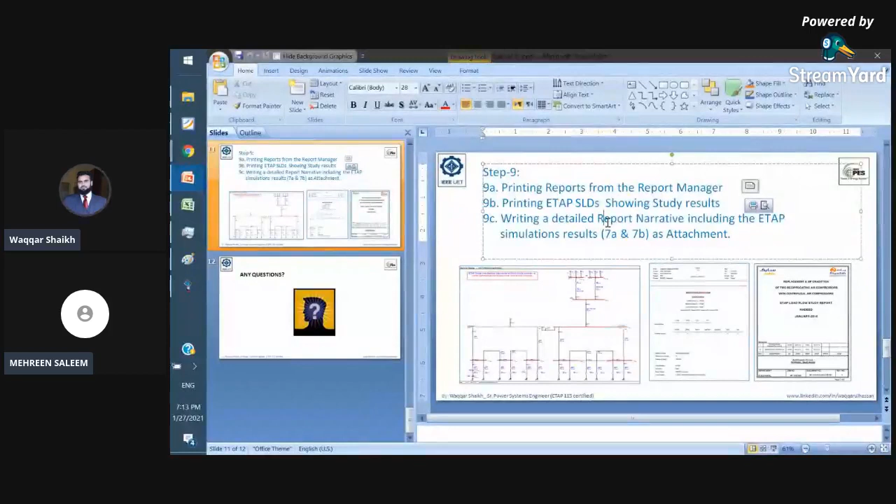Okay, the last topic is conducting a load flow study on an industrial network. For this case study, I have considered the example given in IEEE 399, chapter number 6. This is the example network. Those who want to learn the load flow subject more in detail, I strongly encourage you to read chapter 6 of IEEE 399. It contains all the fundamental knowledge about load flow study, and it also gives you a detailed explanation on this industrial example.

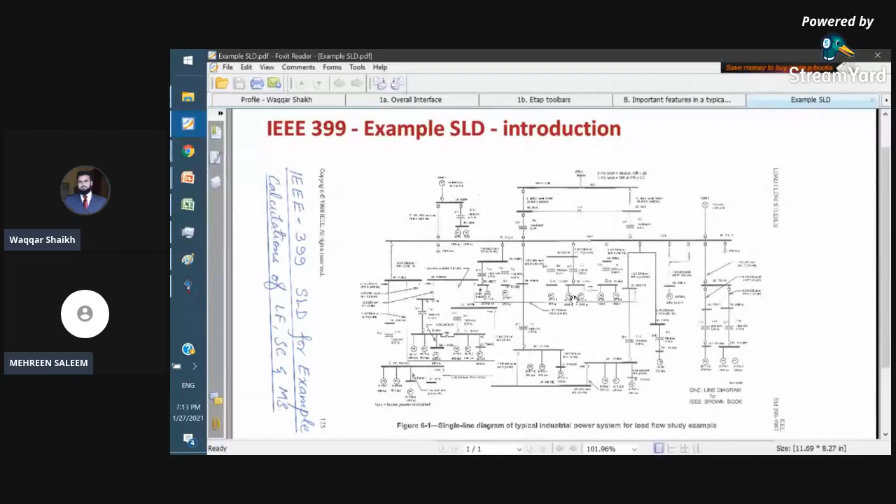What I will do, I have this network example and I will simulate the same example in the ETAP software, and we will see how the results explained in this example from IEEE 399 are matching the ETAP results. It will also give us an idea how the simulations are run, how to interpret the results, what problems can be faced and how to improve those problems.

Okay, now you can see this example. You will be thinking how I can simulate this example in ETAP, as this is a very complex network and I don't have the ETAP model. The good news for all of you is this example is readily available in the ETAP default library. Most ETAP users do not know this example is available there, so they cannot solve it in the ETAP software.

So I will show you how you can access this example. You just need to go into open. Normally the C drive is where your ETAP is installed, and you will go into examples other. You will find a folder called examples other, or other examples, I guess. Yeah, example other, you can see here.

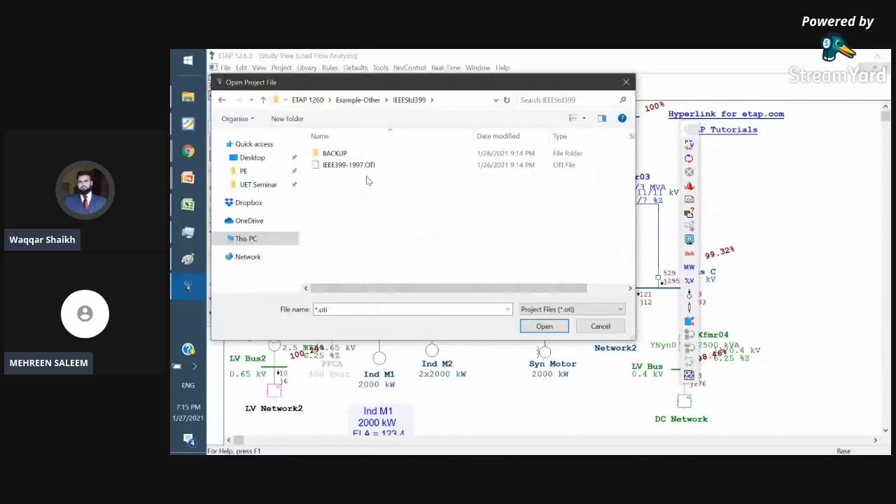In example other, you will find different types of examples already built into the ETAP library. Some of the famous examples are the IEEE 4 bus system and IEEE 9 bus system. For this example, you can go into IEEE standard 399 and click this option. Then it will open that particular example which is already created in the ETAP software, and you can understand it from the ETAP interface.

Okay, so now you can see this when it opens. This is a very smart way of learning from IEEE 399 because you don't need to make any network model; this example is readily available. Let me explain the network. Basically, this is an industrial facility, a rolling mill. In this facility, there are two main generators, Gen 1 and Gen 2 on the right side, and we have the utility feeding in parallel with these generators to share the power.

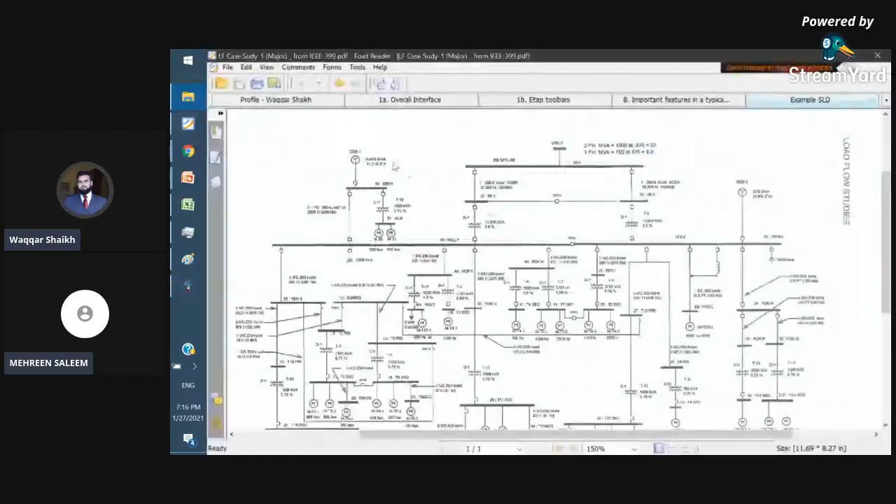In this example, we will run a load flow analysis simulation, and we will see what different problems can occur in this network and how to solve them. As our initial task, I would like to show you how this example is shown in IEEE. It gives you the example information and all the modeling data which is already modeled in the network in the ETAP software.

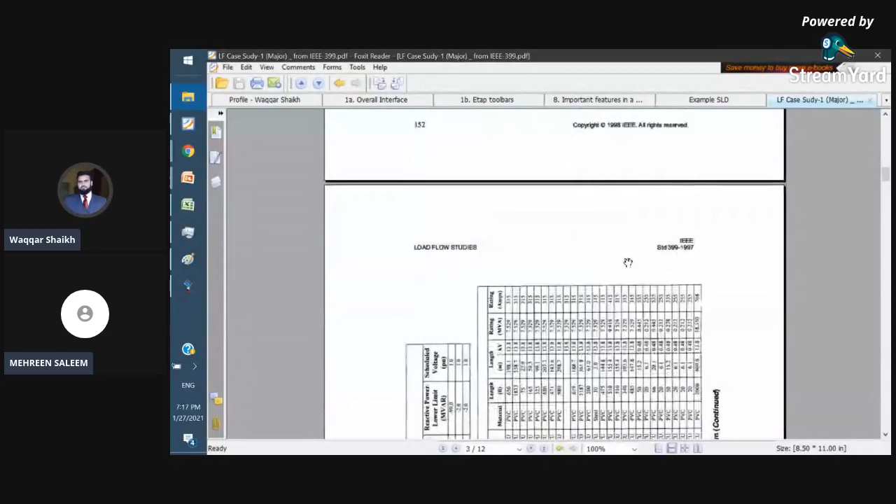You can see it also gives you the generation data and the cable data. Those who want to explore more about the modeling of the equipment can see this data and relate it to the ETAP software inputs. After doing all the basic network modeling, we will have this type of electrical network. Of course we also have to fine tune all the study case options, but for this simulation, I will mainly focus on what the example says here.

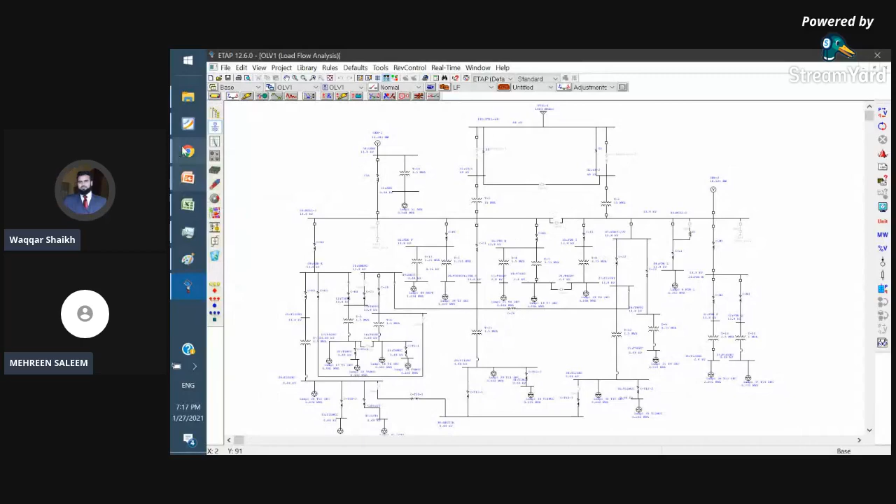If you see, when running the load flow simulation, I'm keeping the example from IEEE 399 on one side and opening the software on the right side. Okay, so I will just run the simulation.

Okay, just keeping the options and the features as existing there, and I will try to see how these informations and what are the outcome of the simulation appearing into the software. I have 12 minutes remaining, and I hope I will finish it in 12 minutes.

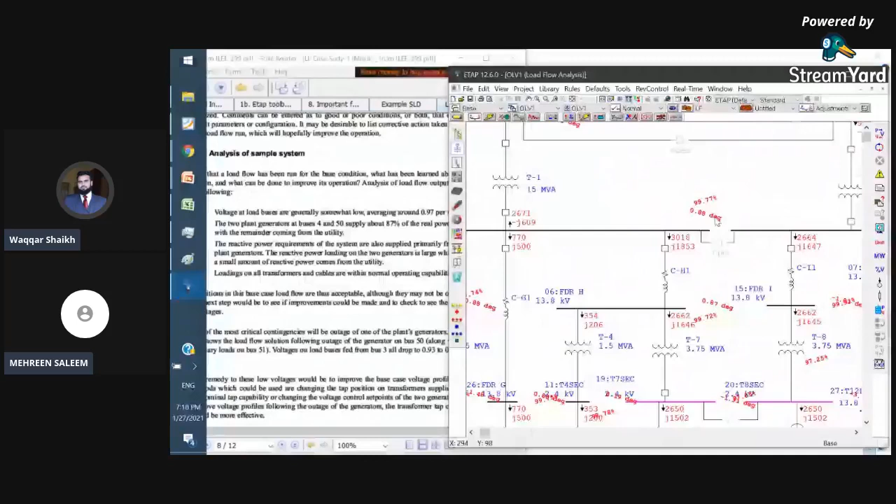You can see here, when we run the simulation, the standard is saying voltage at load buses are generally somewhat low, averaging around 0.97 per unit. So if you see, by running the simulation, you see all the low voltage buses, bus voltages, whether medium voltage, low voltage, they are 99.7, okay, 99.72%. So you can see all the network buses are above 95%.

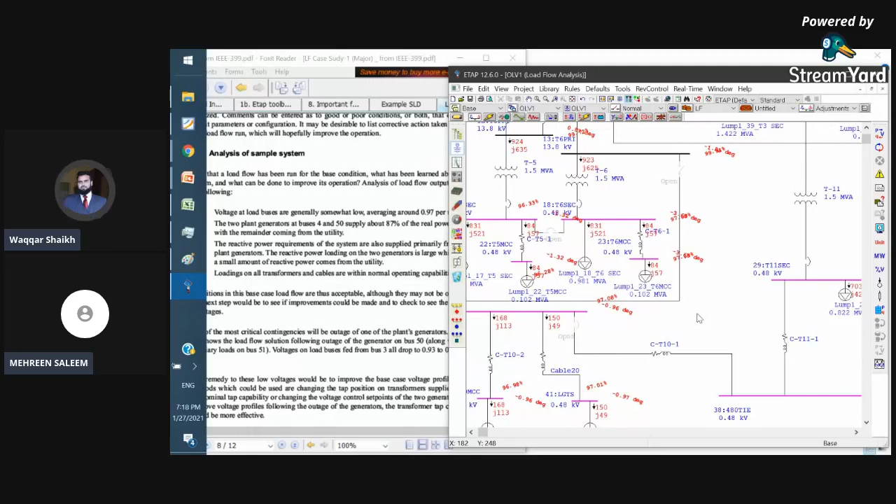Okay, if they are below 95%, then it would be a problem, and the bus colors would become red colored or critical alerted buses. Okay, so when we run the base case simulation without creating any problem in the network, we found that all the buses are within 95% criteria of IEEE 399.

The network has been modeled in such a fashion that none of the transformers are actually overloaded or none of the cables are overloaded. So you can see here that the first observation from running the simulation says all the network bus voltages are above 97%, which is a healthy condition. Okay, then the second point is saying two plant generators at bus 4 and 50 supply 87% of the real power load, with the remainder coming from the utility.

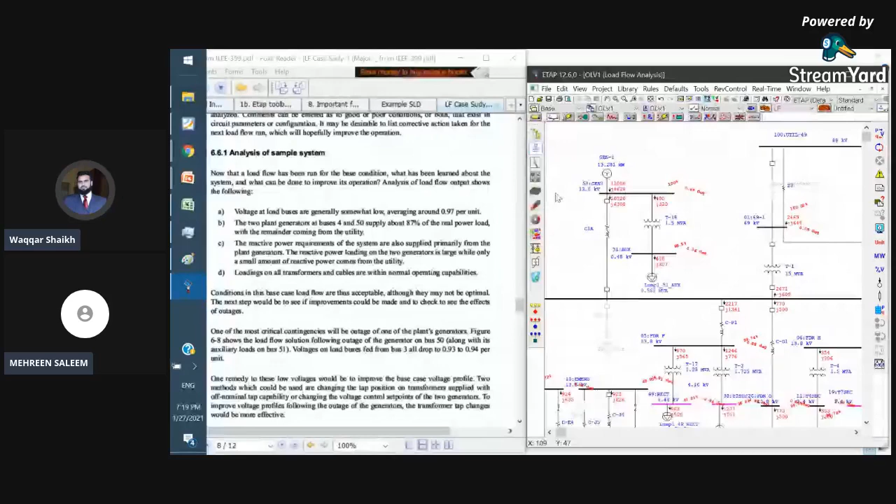For understanding this statement, you need to see what are the active and reactive power injection from the sources. Like we have a Gen 1 supplying 11000 kilowatt as active power and 4628 kVArs as reactive power. So these are P and Qs from the generator into the network. Similarly, the utility is contributing 2906 active power and 196 kVAr as reactive power. Okay, and similarly the third generator on the right side.

So what he is saying, let us do this mathematics here. You can see here, these are the results taken directly from the ETAP software for the sake of saving our time. So what he is saying, the two plant generators at bus 4 and 50 supply 87% of the real power load. So I can show here that these are 11,000 kilowatt, 8,000 kilowatt. If I add them together, so here is the total active power contribution from the generators, and the active power contribution from the utility is 2906.

Okay, so when I sum up all of them, it means the total active power contribution into the network will be 21906. Okay, this is sum of all the three active powers. And if we divide the ratio of the two generator active power with the overall active power flowing into the network, we found that it's 87%, if you do this calculation by taking the result from ETAP and verifying it. So you can see here that it's matching with what it's saying. So it means it's showing exactly the same results which are shown into the example.

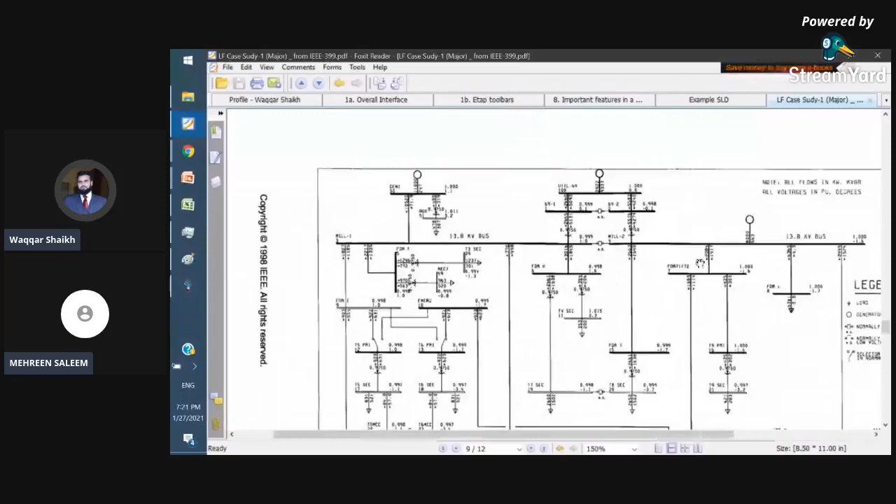And these results in this example are shown as screenshots from another software. This is not ETAP software, but I think this is PSSE software. But you can see the beauty that whatever the results the standard is showing here, these results are exactly matching. For example, here it is showing some other software interface, and here he is showing the active reactive flows in another format. In case of ETAP software, it has some other format. Because we are learning this example from ETAP interface, we are not studying these single lines, we are directly seeing the results from ETAP software.

Okay, so now going back into the analysis part, I hope you can understand the second part. I will also share this Excel sheet so that you can do this mathematics again. And you will find that most of the active power flows are contributed from the generators. What does it mean? It means we are less loading the utility power source, and the network is being powered more from its local resources. So there will be less electricity bills because we are taking less from WAPDA or Saudi Electricity Company or whatever the grid authority company is there.

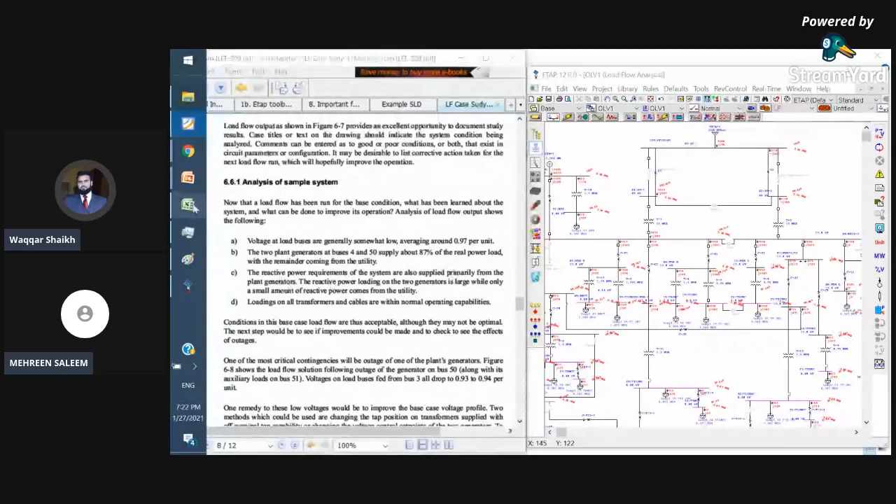The third thing is the reactive power requirements of the systems are also supplied. Now the second point was about the active power. The third point is about the reactive power. The reactive power is primarily coming from the plant generation. If you see here, the two generators are supplying more reactive power, whereas the reactive power coming from utility is 196 kVArs only. So this is the third verification on this study. And the fourth study verification is loading on all the transformers and the cables are within the operating range.

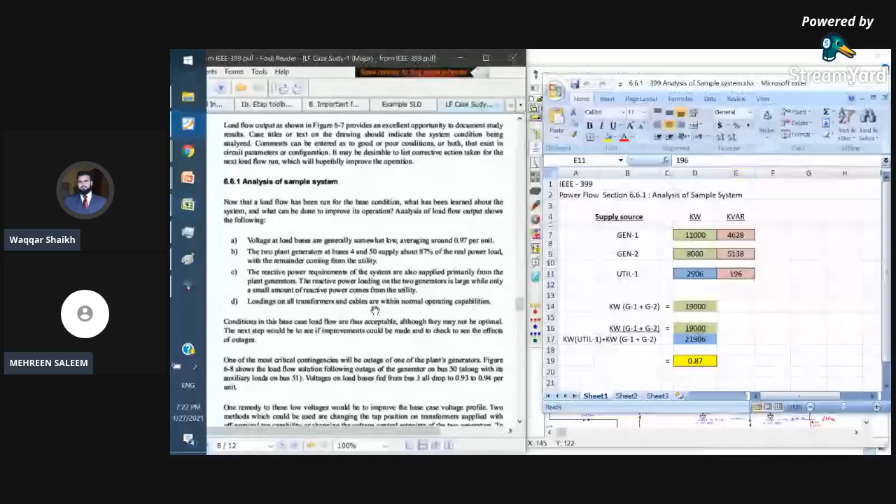So it means whoever has designed this network as a case study, he has taken care of all the network sizings. You will not find any cables oversized, undersized, or transformers undersized. So there is no cable or transformer or any electrical component going into critical or marginal alerts. Maybe there are some marginal alerts, but the marginal alerts are not to be worried about.

Okay, because marginal alerts means that they are closer to the limits, but they're not exceeding the limits given by the user. Okay, so this is a normal healthy scenario. In this scenario, you don't need to be worried. Now the standard is saying that one of the most critical contingencies will be outage of one of the plant's generators. Okay, so let us make a problem here.

In this normal running scenario, everything is fine. But what happens if one of the generators goes out of service? So let us do this exercise. I will open this breaker. Okay, and now I will run the simulation. So by running the simulation, what will happen?

Because we have less power sources available, you will see that some of the network buses, especially those farther from the sources, because of the impedances, will be suffering from voltage less than 95%. Whereas the international standard says your voltage shall be minimum 95%. So when one of the generators was out of service, you have come across the problem of under voltage in the network. Okay, this is the problem.

In fact, this is one of the most repeatedly found problems when we run the simulations. When we investigate the network under any contingency condition, we find that we have under voltage problems in the network. So what can be the solutions to overcome this under voltage problem? One solution can be to increase the cable sizes, right? Because by increasing the cable sizes, we are decreasing the cable impedance.

Okay, because resistance is equal to rho L over A. A is the area of the cross section. When we increase the cable size, it will increase the ampacity of the cable. By increasing the area of the cable, we are decreasing the resistance of the cable. Okay, rho L over A. So by increasing the cable size, we are reducing the resistance, and by reducing the resistance, we are having a much better voltage profile, because less resistance means less voltage drop, right?

So are we going to change all the cable sizes in this network? Of course, this is not a practical solution, that if you have an under voltage problem, you are increasing the cable sizes throughout the network, especially for an existing installation. Okay, so what can be the most optimal solution to handle this problem? One of the best ways to solve this problem is to change the transformer taps. This is one of the most recommended solutions to optimize the network under voltage problems.

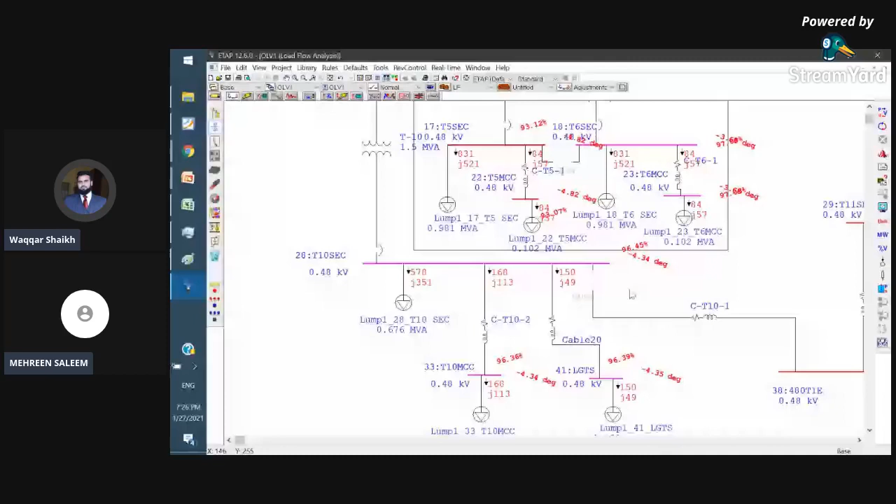But there can be many other options, like we can introduce capacitor banks into the network. The excess reactive power given by the capacitor banks will boost the voltage level. Another option is to shift the loads, because the more inductive loads are concentrated at one part of a network, the lower the voltages, especially away from the sources. So by distributing the loads properly in the electrical network, we will have a much better voltage profile. But most of the time, a practical solution to achieve a fine voltage profile above 95% is to play with the transformer taps.

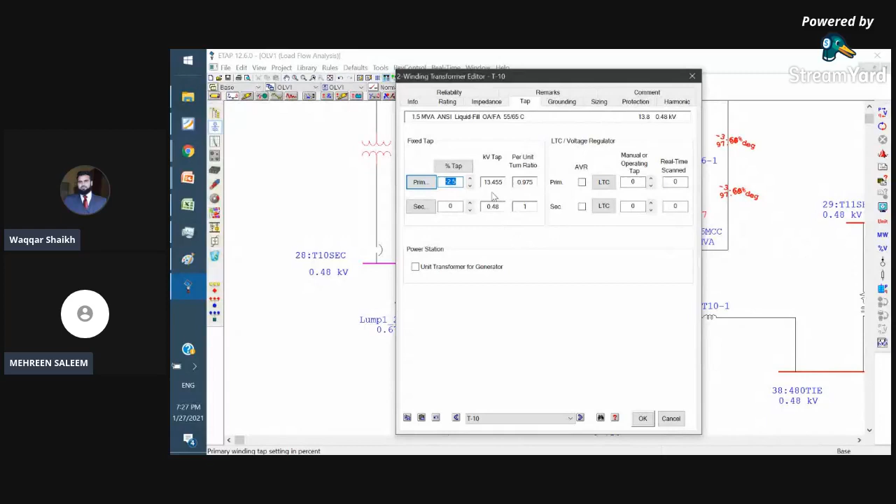Some students can ask why I have lowered the transformer tap in order to restore the voltage to the right value, because I have put a minus 2.5% tap, whereas my voltages are to be raised. It's a very important question you can be asked: why will lowering the tap improve the voltage? So I'm just going to explain this answer in the last 2 minutes.

Whenever we have a transformer, you know that the transformer has primary and secondary windings, right? This is the primary winding of the transformer, this is the secondary winding of the transformer. When I say tap of the transformer, it means there are some tappings from the transformer winding which will enable us to remove or include some of the winding part. So by changing the taps on the primary side, for example, if I am making a minus 2.5% tap here, what does it physically mean?

It means that out of 100% of the tap of the transformer, I am removing 2.5% of the tap. I am removing some part of the winding from the primary side. The voltage on the primary side is considered as volt per turn. So when I remove some part of the winding from the primary side, my volt per turn will increase, right? If I add more winding into the primary side, it will decrease my volt per turn. If I reduce some part of the winding, it will increase my volt per turn.

So in order to bring the voltage higher on the secondary side, we are required to lower the tap of the transformer by minus 2.5 or minus 5%. Lowering the tap of the transformer means we are removing some part of the winding. In the ETAP interface, we give minus 2.5 or minus 5%. In case of on-load tap changers, we can have up to 17 settings on the higher side and on the lower side, up to 32 or 33 tap positions. But for a normal distribution transformer, we have 5 settings: 0, plus minus 2.5%, and plus minus 5%.

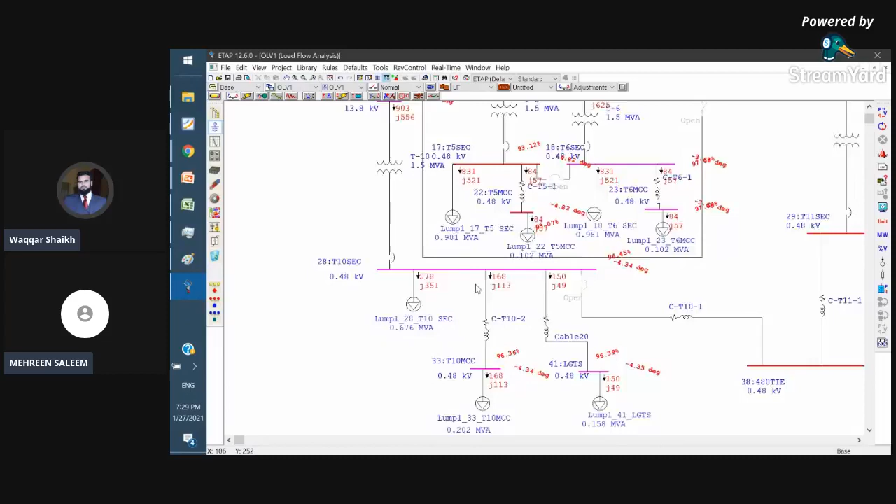So I hope I am done with the presentation. I've explained what the most important things to consider are when we are doing the simulations. Okay. Any questions?

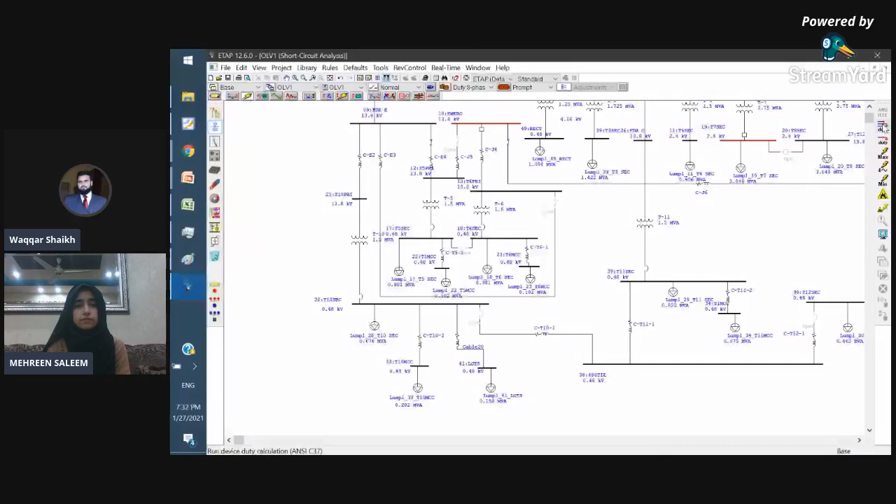Okay. Any other question, Mehreen? Sir, next question is explain dumpster. Dumpster. Okay. I think I forgot to explain the dumpster feature. I will explain it here.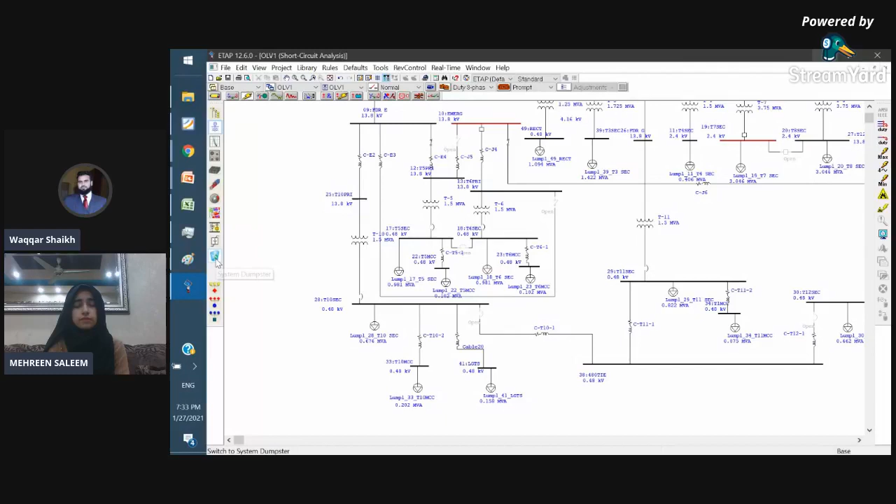Now, how the dumpster works: it's not just like a recycle bin. A recycle bin is something where you throw things and you can go inside and restore them. In ETAP software, whenever you are deleting, cutting, or copying any element, it will always go into the dumpster. Let me take an example. I'm selecting this component and doing a cut. It seems that it has been cut, but it has gone into the dumpster. See, this is the dumpster.

So what will happen if you want to paste it? It will not come with the same component tag, because pasting it means it will create a copy of it. Never ever use the paste feature in ETAP for any function. Most of the time people use paste very frequently, but where you are cutting something, you must right click and say move from dumpster. Then you will be able to bring it back.

This dumpster feature is different from the recycle bin, because in the recycle bin, to bring a component back, you go into the recycle bin and click restore, but there is no restore button here. In the dumpster you can only purge the element, remove it permanently from the program, using purge or purge all. There may be many components in the dumpster. If you want to bring one back, simply right click and say move from dumpster. This component will be back in the window.

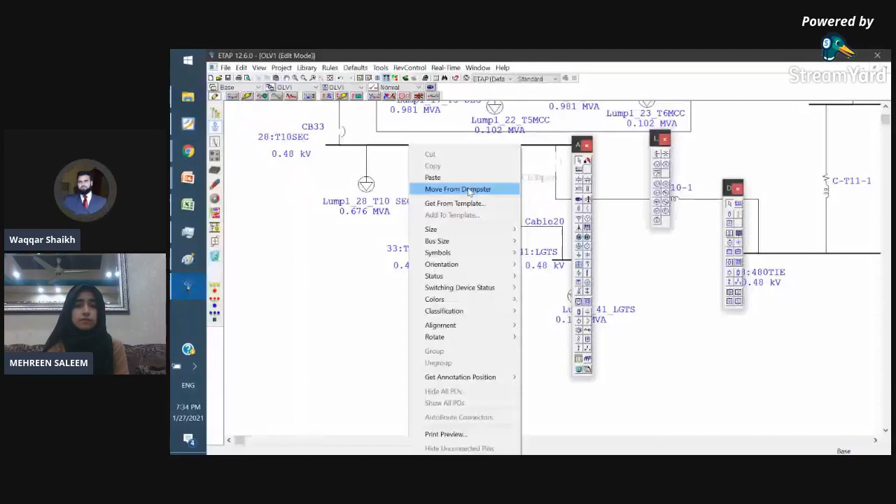So even if you are cutting it, it goes into the dumpster, and you bring it back by moving from dumpster. If you delete it using the delete button on the keyboard, again it will go into the dumpster. You can see here. And to bring it back, you should not use the undo option. ETAP undo will not work. You have to right click and move from dumpster. Again, this deleted component will be back.

Also, if you are copying, it will create a copy of it with another tag number in the dumpster. You can see now this is T10MCC1. So now if I say paste, it will not bring T10MCC1. It may bring T10MCC2, because I am not bringing it back from the dumpster. I'm saying paste, so it is bringing T10MCC2.

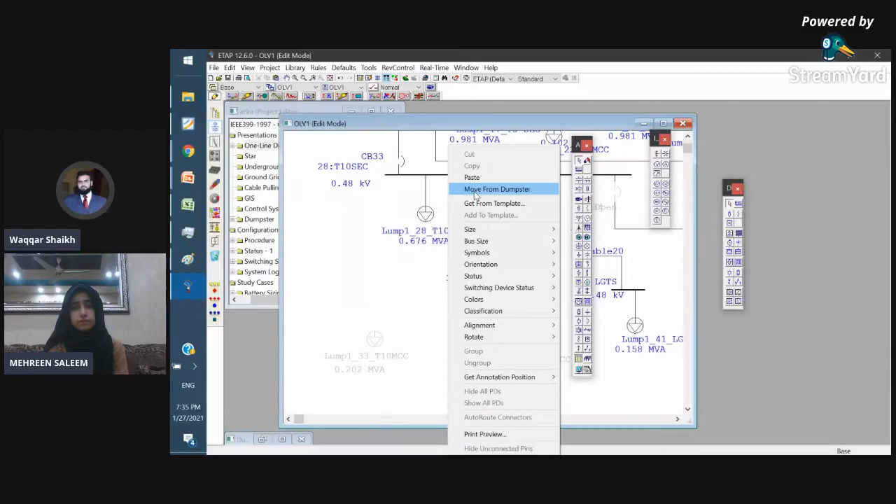So it means one serial number or sequence item has been missed out. It is not the same component which you copied; it has created a new component in the dumpster and brought another copy of it. So to bring it back properly, you have to use move from dumpster. This is MCC1, which went into the dumpster as a copy of the first component when you copied it, and when you said move from dumpster, it was back in the main window.

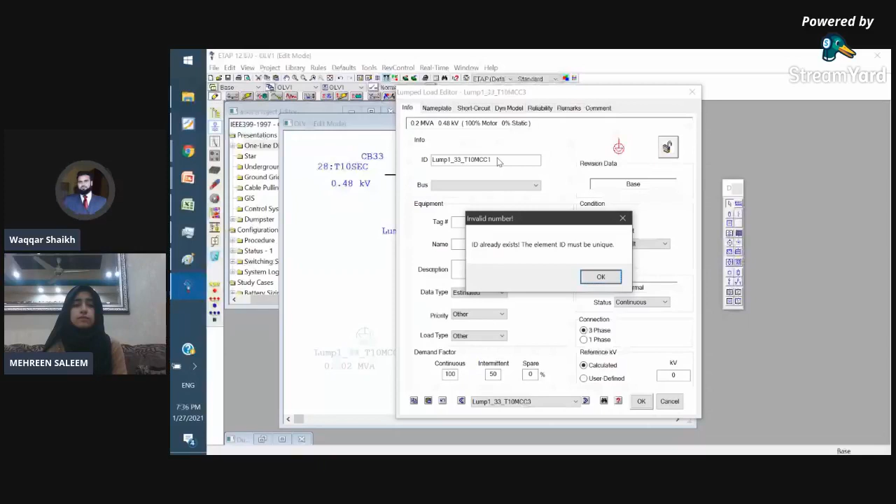So dumpster is something which is tricky. Sometimes the students face difficulty of tags mismatching. For example, I am deleting it, okay, and I want to copy it, and I want to give a name of MCC1. If I say MCC1, you will find that it will give me an alarm or alert that you must have a unique component. Why does it happen? Because already a copy is available for MCC1 in its dumpster.

If you want to bring it back, then you have to delete it, and you have to go like last in, first out. This is the concept. If I want to bring my MCC1, I should first bring MCC3 and then MCC2 and 1 together, because I deleted them together. If I say move from dumpster, it brings MCC3. If I again go move from dumpster, it will bring MCC2. And then if I do this feature again, it will bring MCC1.

So I hope you can understand how the dumpster feature works. It is just like a stack, where whenever you do delete, cut, or copy, it will go into the stack. And if you select the option of move from dumpster, it will bring the last in, the last one which was deleted or cut or copied, back into the main window. So if you want to remove this component from the ETAP software, then you should go into the dumpster, select that particular component, and use the option of purge, as I have shown you.

Like select this. Sorry, this is dumpster here. There is no item deleted. I am deleting it. Okay, and now I'm going back to the dumpster. I am selecting this, and if I say purge, it will delete this item permanently from ETAP. Now you cannot bring it back. Or if I choose purge all, however many components are there in the dumpster, they will be deleted permanently. Okay, so I hope my answer has been given.

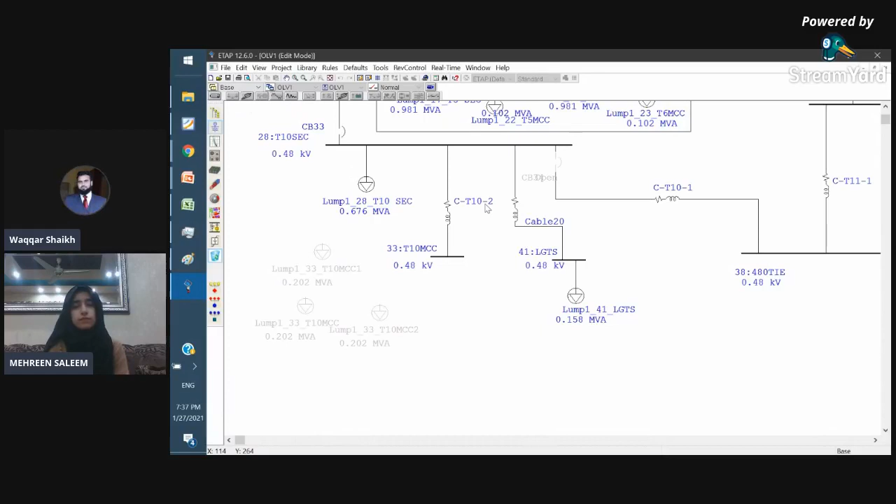Any other question? Sir, there is another question. How to connect any DC generation unit before the inverter in a solid state transformer, as there is no bus? Okay, well, I have no experience in DC power systems studies. We are doing some part of DC, mostly in arc flash studies. DC generators I have not worked with, so I don't want to mislead or misguide you on something which I am not conversant with.

Next. So next is, cable libraries are not available for those cables which we use in Pakistan. How can we make a library of those cables which are available? Can you please explain in short? Very good question, because the ETAP default library has some international vendors' databases, and Pakistan cables or local vendor cables are mostly not available in the ETAP software.

So the first thing is, before modeling the cable, you must know the most important cable parameters to be taken from the cable manufacturer's database. To make it simple, there are 2 important cable parameters. Any cable, whether 3-core or single core, would have a resistance value and an inductance value, both given in ohms per kilometer. Sometimes they give the inductance in millihenries or henries, then you can use 2πfL to bring it into ohms. So these are the 2 most important values of a cable.

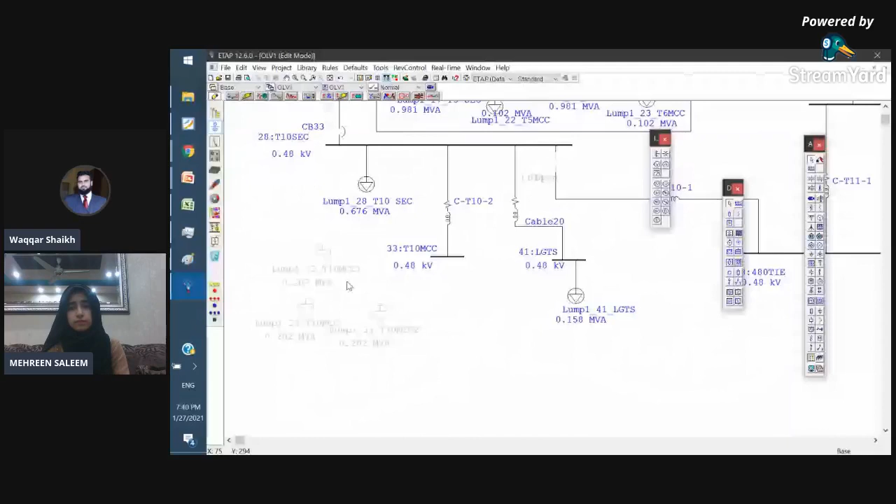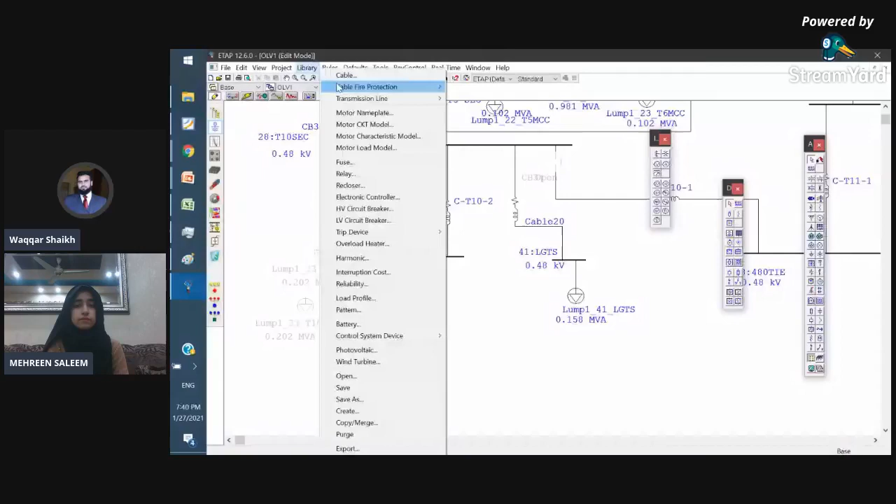In the library, ETAP has a default library which is accessible from the cable editor. Like if I'm opening any cable, you can access the default library from here, right? If you click here, it will show you the different possible sources from where the cable database has been created. For example, I might have already created some Pakistan cable databases here based on my project needs, but I will tell you how to create a new cable in ETAP.

So the best and easiest way is to go into the ETAP library option, go to the cables option. There are two approaches. One approach is to make the cable from scratch. It will be much time taking. Making a cable from scratch means you are not using any of the existing information. So it's always advisable that you do not make a cable from scratch. Just fine tune one of the cables, which is your desired cable you want to make.

Like I want to make a cable for a 50 hertz system, a copper cable with 1 kV voltage grade. Ultimately you will come up with a few manufacturers which have all these cable sizes available. You can see these are the different cable sizes available for this manufacturer. For example, I want to create a 4 mm square cable, so I will simply select one of the manufacturers and make a copy. I am not changing the data of this manufacturer, but I am using its existing database.

So I will create the same source by making a copy, and I am calling this source FR cables. Then I should confirm that the rest of the parameters are the same: cable conductor, insulation, frequency, installation conditions, and so on. Also you can put these degrees for the above ground or underground ampacities. The ampacities are not to be inputted; these are only the conductor temperatures. Just make a copy of it.

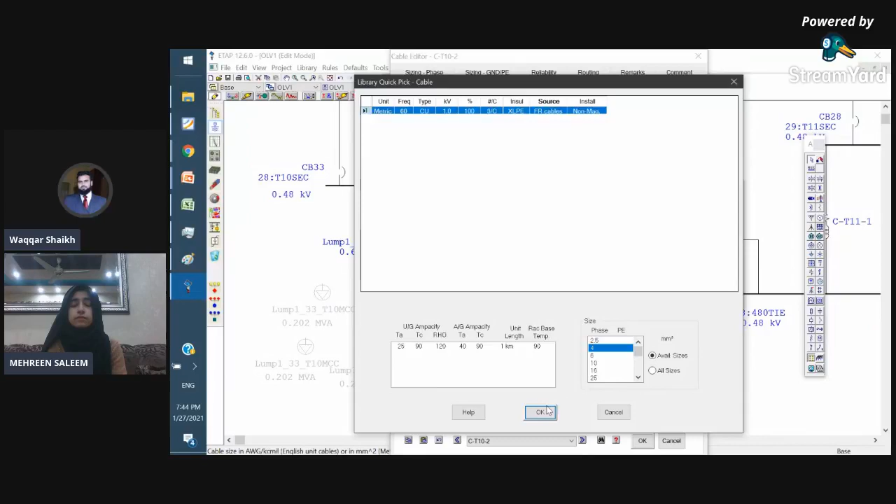Now if I go back into the cables library and filter my manufacturer, you will find FR cables listed over here. See, if I select this FR cable and select 4 mm square cable here, then it would give me the same ampacity that I have input into the software. So it would take into consideration the same resistance and reactance values that I have already input into the ETAP database. So this is the way we can model the cables into ETAP library.

Any question? So next question is why in sequence values voltages are better in phase A than B and C while having a short circuit study, for example, of a 4-bus system.

Okay, it's more specific about the simulation. I have to investigate it more in detail. I cannot give the answer just by this question without having the context about the project. I have to see what are the inputs given into the project. And the main thing is, if you are running a short circuit study, why are you required to go into the sequence values? My concern is sequence values are not considered in the short circuit study.

Sequence values are considered for the protection relays to understand the negative unbalance or under voltage or over voltage conditions in the network. So sequence values are not useful when we are doing a short circuit study for finding the withstand capability of the equipment. They are useful for giving the protection settings, directional settings. So I don't think this question will have any impact on your study outcomes.

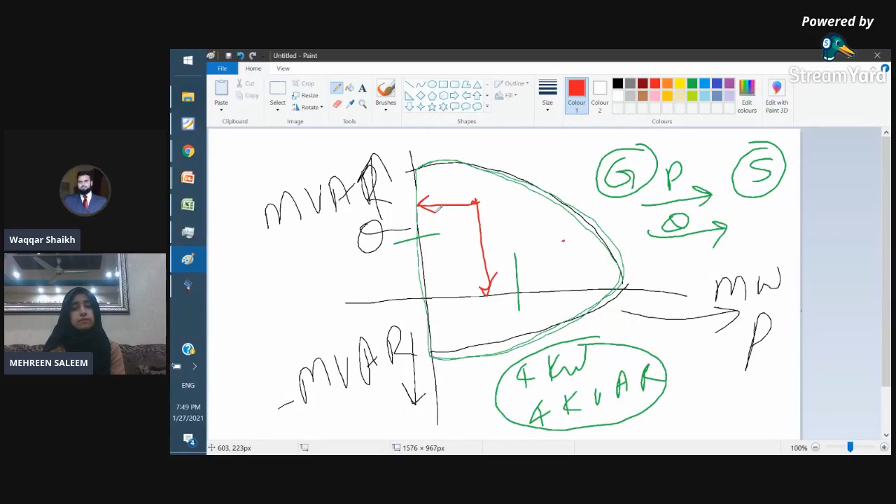This is one set point, this is the operational value of the generator. Like a generator is currently providing 4 kilowatts and 4 kVARs. This point keeps on moving under different operational scenarios. Sometimes this point is here, it relates to this megawatt and this MVAR. Sometimes the point can come here; this relates to this megawatt and this MVAR. So depending upon the load characteristics or load demand, this point is going to be changed.

Whenever you have a situation where this point goes out of this range, what does it mean? The generator is providing more reactive power, which is the Q power, to the network. It will jump through this reactive capability limit, which is dangerous for the generator, and it will damage the generator. So we never let this situation come. Before reaching this situation, the protections inside the generator will come on for safeguarding the generator, and it will shut the generator, cut off the load, or do some load shedding.

Whenever this situation comes, it is called the overexcitation situation of the generator, where we are drawing more reactive power than the acceptable limit. If you are crossing this range, this is your overloading. If you are going above this range, outside this curve, you are going into the overexcitation region, where your generator cannot supply that much reactive power which you are trying to draw from it. So there are three concepts: overloading, overexcitation, and underexcitation.

What does underexcitation mean? Underexcitation relates to the lower region. It means there are some loads in the network which are injecting reactive power into the network, like capacitor banks or long transmission lines. If you have excess reactive power in the network and it is not being used by inductive loads, that reactive power will flow back into the generator. This type of load flow situation we call underexcited operation. Underexcited operation is not a normal operation.

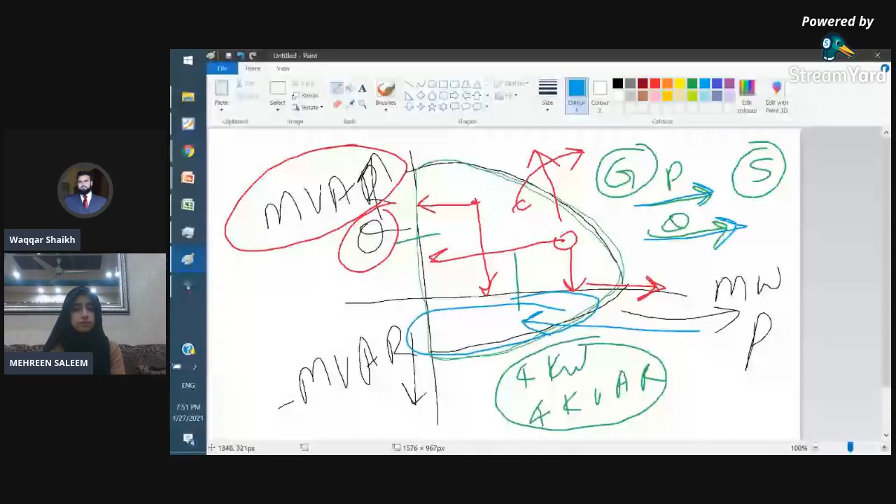Under normal operation, we always have active and reactive power flowing from the generator into the network. This is called overexcitation operation of the generator. So in both scenarios, if the generator is absorbing more reactive power, it will shift the operating point out of this region. When I say the point is crossing this area, it means more and more reactive power is drawn from the generator. But in the lower region, if the point is going below, it means it is absorbing more and more reactive power. It's again dangerous to the generator.

So it's important that the generator be operated within its capability limit. The load should not draw more reactive power or more active power from the generator than its limiting value. And similarly for reactive power absorption, the network should not inject excess reactive power into the generator.

In order to check the excitation ranges, the first thing is you have to properly model the capability curve here. It's again a detailed discussion how to model it. I have a detailed presentation I made explaining how to input this reactive capability limit model, from the vendor data up to the ETAP modeling. I will share it if students want it. There are step-by-step procedures.

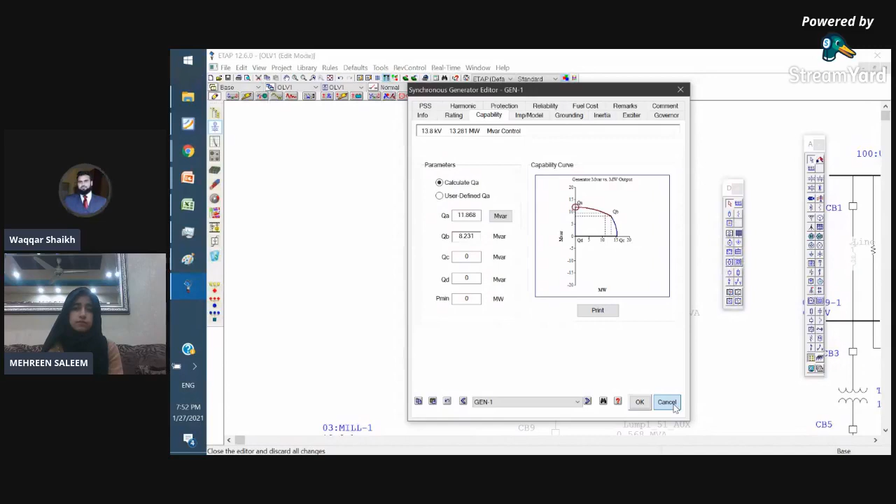Now, once we have properly created the capability limit of the generator, in the load flow study, if you go to the study case editor, which is very important for running the right simulations, you have the option of overexcitation, with critical and marginal limits, and underexcitation. By giving the ranges here, it will check the actual outward active power from the generator. If that active power is more than the capability limit ETAP has taken as input, it will give you an overloading alert.

For active power alerts, it will give you overloading, which is shown here. This is the overloading alert region, where we have 100% to 95%. So for example, if the generator is able to deliver 100 kilowatts and your load is trying to draw 105 kilowatts, the generator will run into an overload condition.

The second type of problem is the overexcitation condition. So what is happening if you have excess of reactive power demand from the network? If the generator has a capability limit which allows 100 kVAR to be delivered, but you are trying to draw more than 100 kVAR, then it will give you overexcitation on the generator. This will be another type of alarm on the generator, and you have to reduce your load so that your load will be operating within the generator capability curve.

And if you have excess of reactive power in the system, what will happen? It will be absorbed by the generator, and the generator may go into the underexcitation alert state, which means that now the generator is absorbing more and more reactive power. Okay, so that is again a dangerous situation. So the first thing is to properly model the generator capability curve, and then fine tune the limits which you want to respect when your simulations are done, and then you will be taking care of the overexcitation, underexcitation, and overload conditions of a generator.

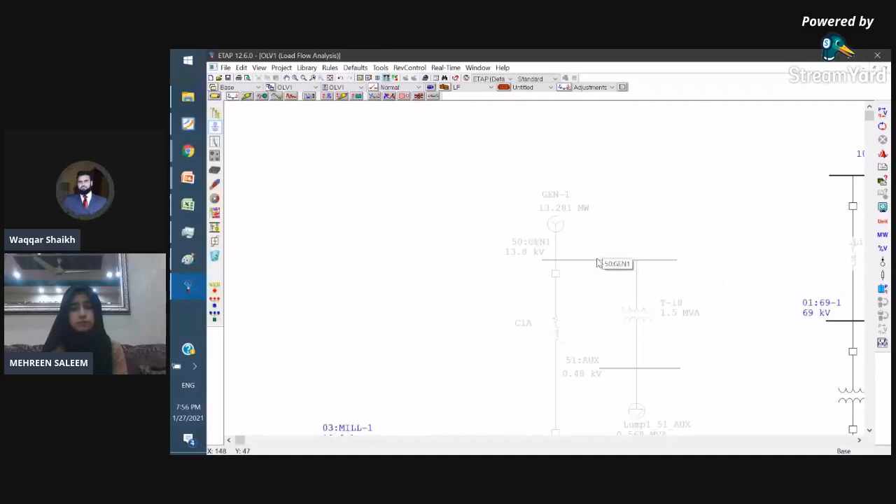Normally, in the ETAP software, load flow studies are done based on the same fundamental concepts given in IEEE 399: P, Q, V and delta. These are the 4 parameters which are to be estimated in the load flow, which is done with the same methods: Newton-Raphson, Gauss-Seidel, or fast decoupled. So there is no distinction between marine and ground-based installations for load flow.